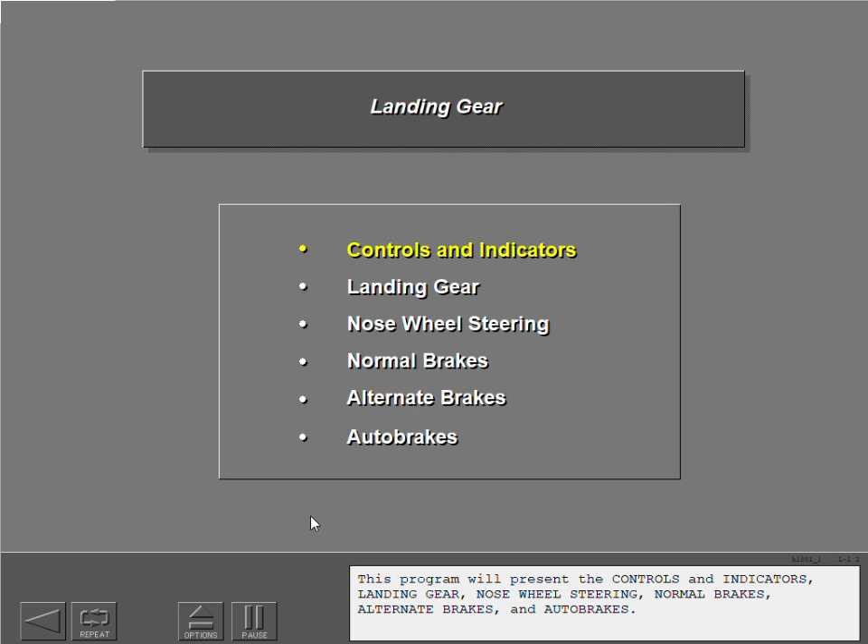The landing gear controls and indicators are located on the captain's instrument panel, the center instrument panel, the first officer's panel, the left sidewall, the control stand, and the rudder pedals.

The landing gear lever is located on the center instrument panel. Red and green landing gear indicator lights for gear position are located above the lever.

The landing gear lever has 3 positions: up, off, and down. A placard below the handle displays the landing gear limit speeds.

Maximum gear extend speed is 270 knots, or 0.82 Mach. Maximum gear retract speed is 235 knots. Maximum speed with the gear extended is 320 knots, or 0.82 Mach.

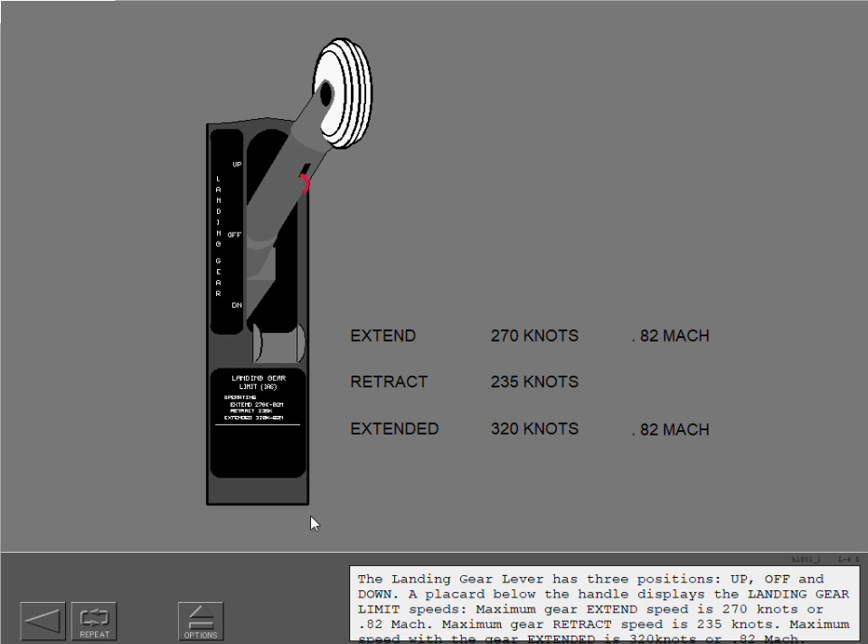Manual gear extension handles are located on the cockpit floor to the left of the first officer's seat.

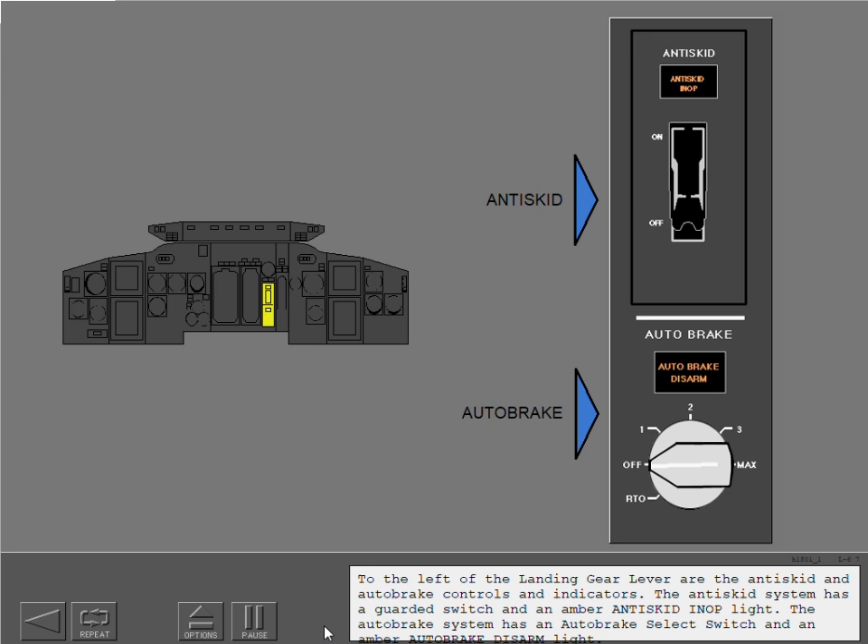To the left of the landing gear lever are the anti-skid and auto brake controls and indicators. The anti-skid system has a guarded switch and an amber anti-skid in-op light. The auto brake system has an auto brake select switch and an amber auto brake disarm light.

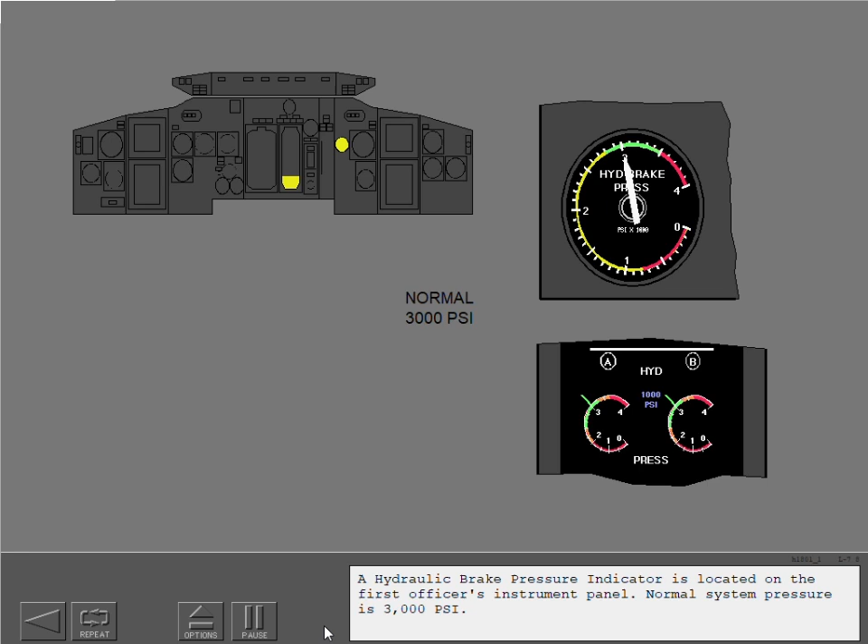A hydraulic brake pressure indicator is located on the first officer's instrument panel. Normal system pressure is 3,000 psi.

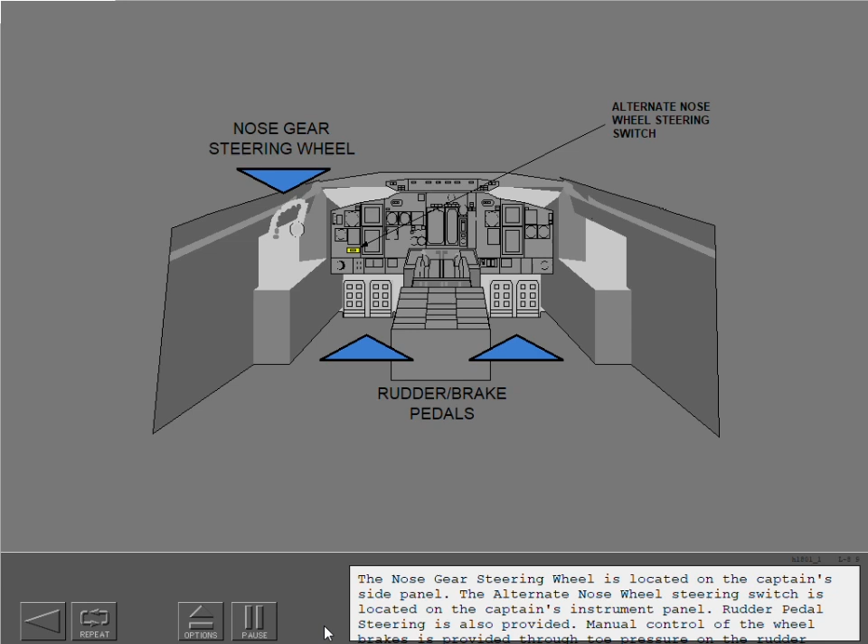The nose gear steering wheel is located on the captain's side panel. The alternate nose wheel steering switch is located on the captain's instrument panel. Rudder pedal steering is also provided. Manual control of the wheel brakes is provided through toe pressure on the rudder pedals.

The parking brake lever and red parking brake warning light are located on the control stand.

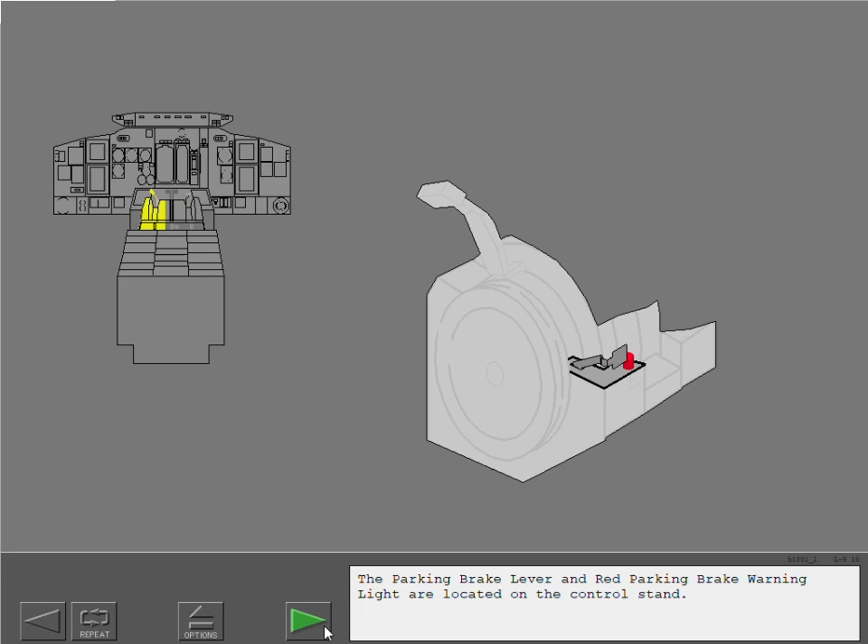With a review of the controls and indicators complete, we are ready to discuss the landing gear.

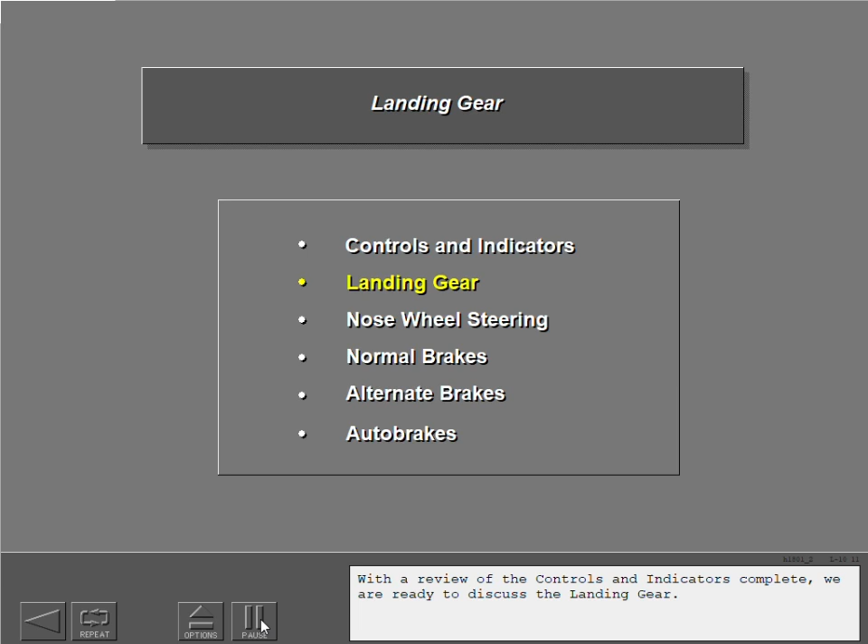In normal operation, the landing gear is powered by hydraulic system A. Hydraulic system B can raise the gear through the landing gear transfer unit.

The 737 has a dual-wheel tricycle landing gear. The gear retracts into the fuselage to reduce drag.

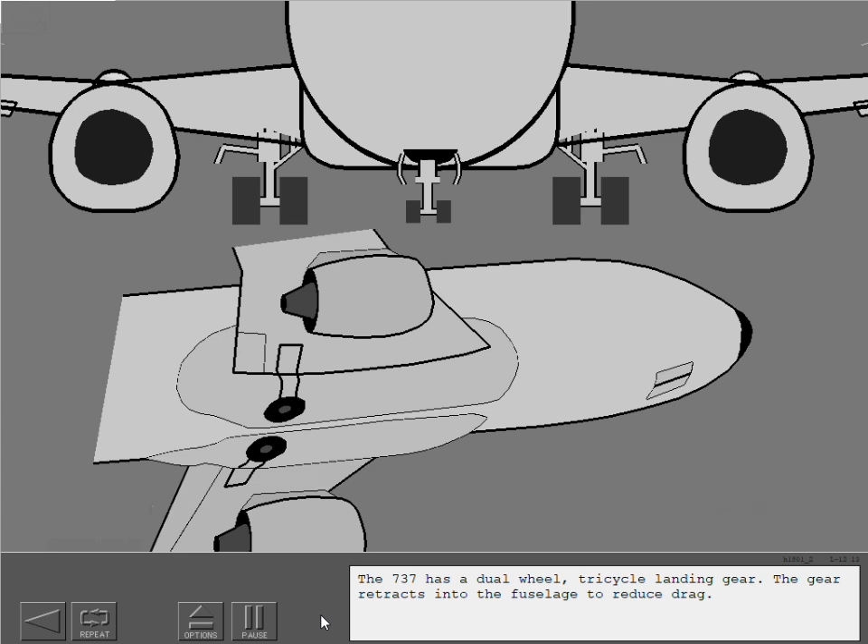Doors attached to the main gear struts provide cover for the wing and portions of the fuselage openings when the main gear are retracted.

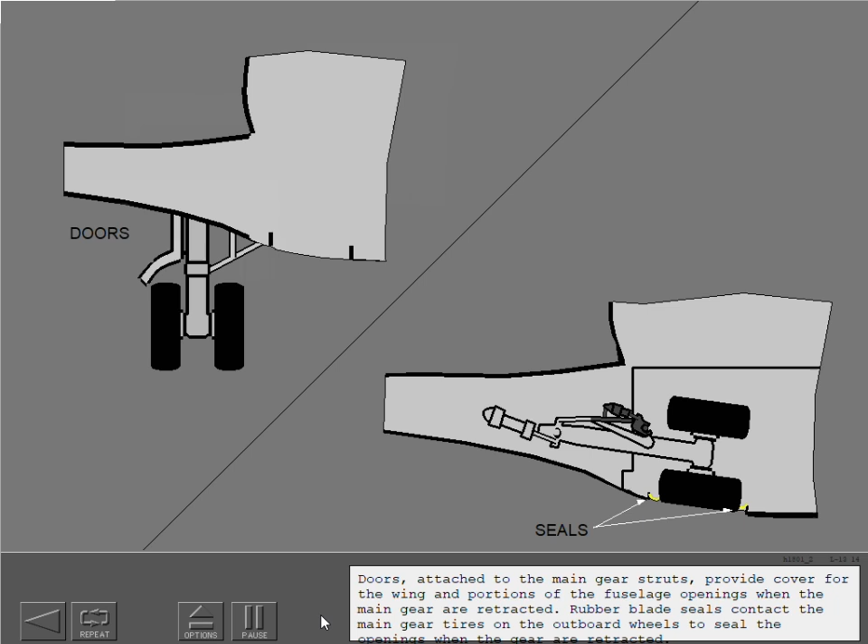Rubber blade seals contact the main gear tires on the outboard wheels to seal the openings when the gear are retracted.

The nose gear doors are mechanically linked to the nose gear. There is no indication in the cockpit of nose gear door position.

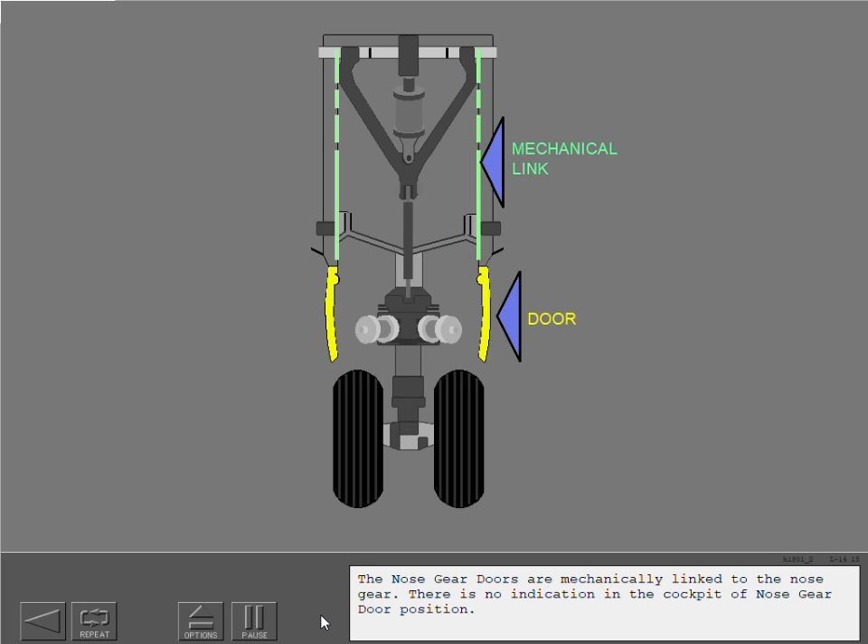To raise the landing gear, first pull the landing gear lever out of the down detent. The red gear indicator lights illuminate, indicating a disagreement between lever and gear position. The green lights remain illuminated until the gear leaves the down and locked position.

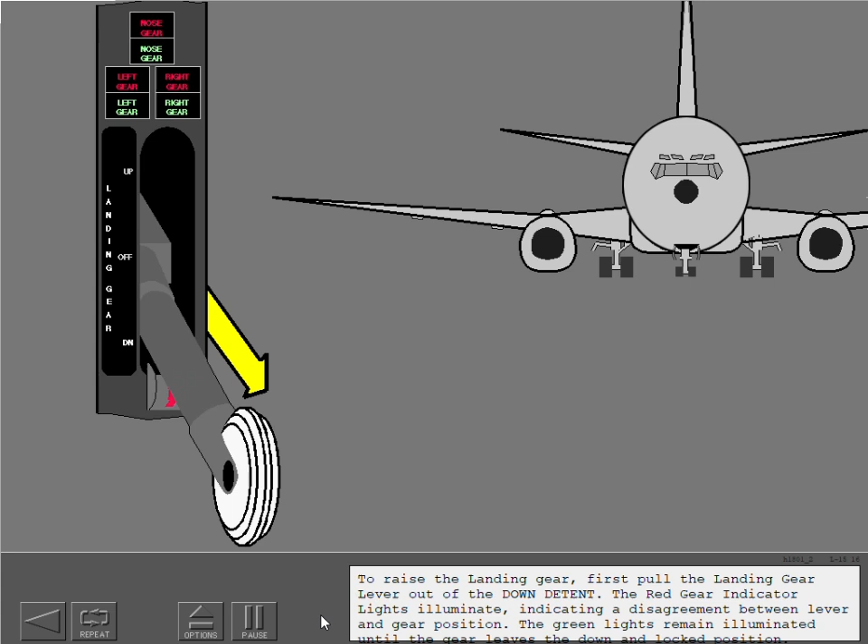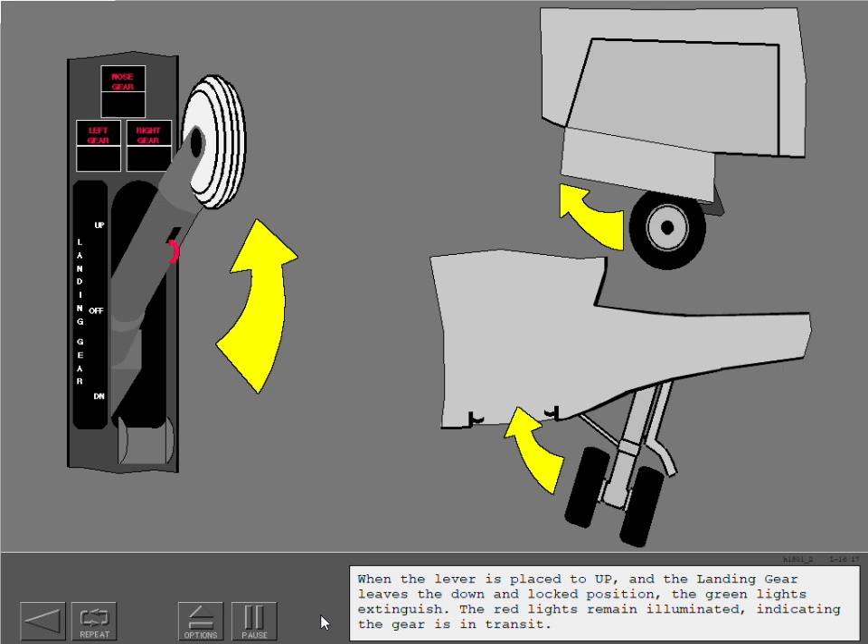When the lever is placed to up and the landing gear leave the down and locked position, the green lights extinguish. The red lights remain illuminated, indicating the gear is in transit.

As the main landing gear retracts, the brakes are automatically applied to stop the rotation of the main wheels. A snubber in the nose wheel well stops the rotation of the nose wheel.

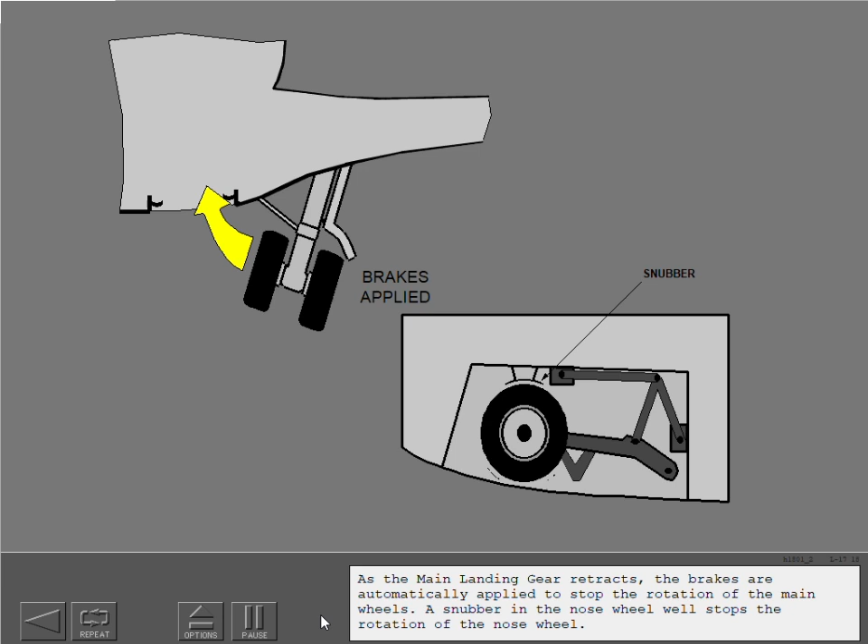The nose gear is held in the up position by an over-centered link. The main gear is held by an up-lock hook. These are mechanical locks and do not require hydraulic pressure to hold the landing gear up and locked.

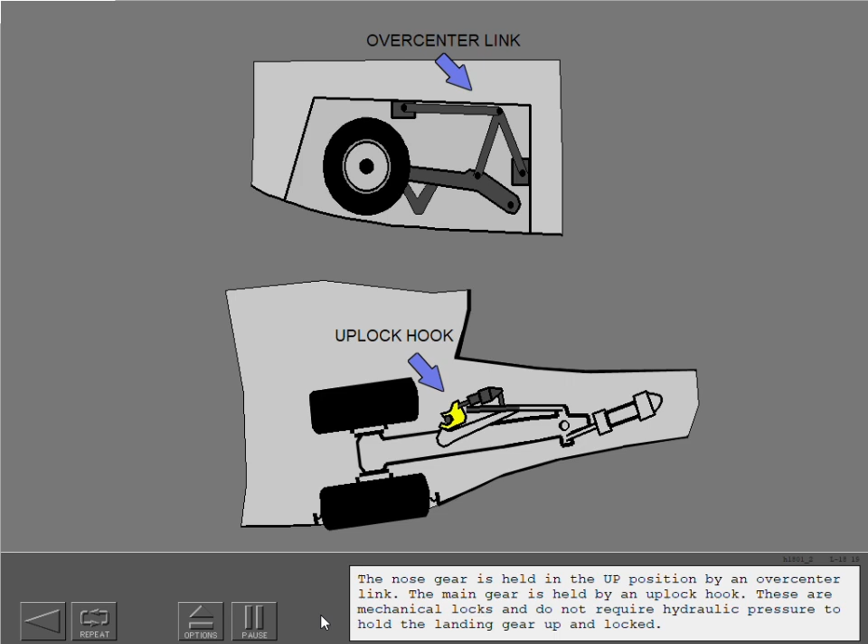When the landing gear is up and locked, the red indicator lights extinguish. After a minimum of 10 seconds, the landing gear lever may be placed to the off position. This removes hydraulic pressure from the landing gear system.

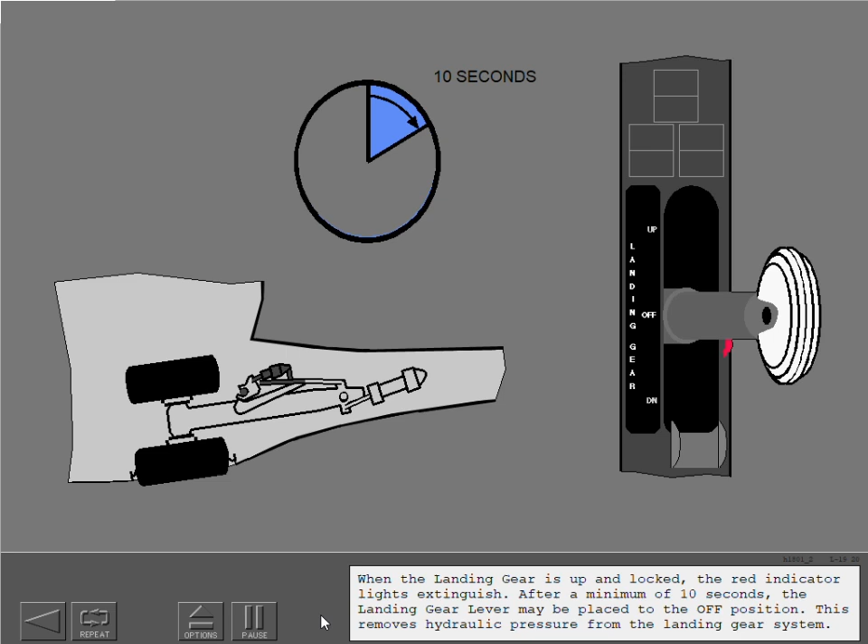There are several landing gear retraction safety features. When on the ground, a lever lock prevents gear lever movement to the up position. If the gear lever will not move to the up position after takeoff, pulling the override trigger bypasses the lever lock and allows the landing gear to be raised if necessary.

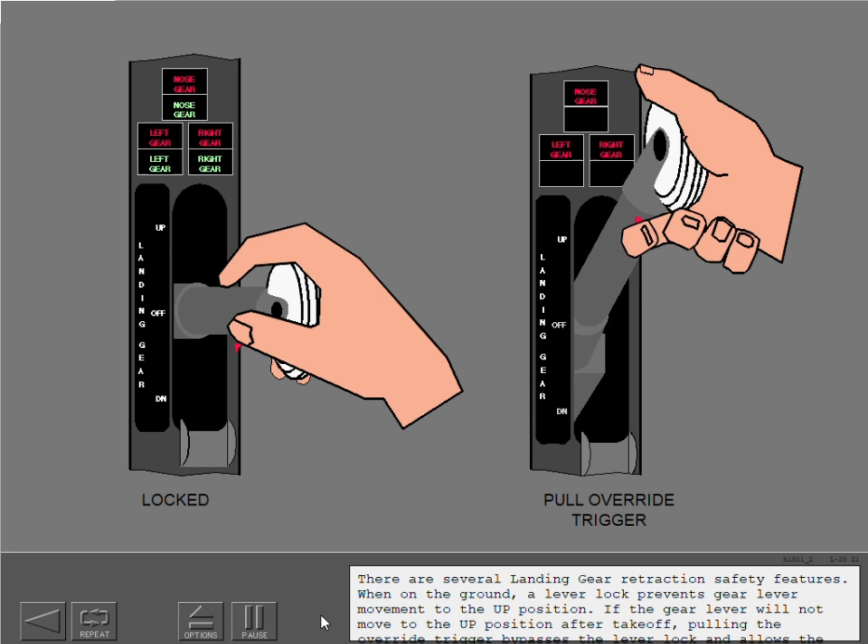Also after takeoff, if engine number 1 should fail, a landing gear transfer unit ensures there is sufficient hydraulic pressure to raise the landing gear.

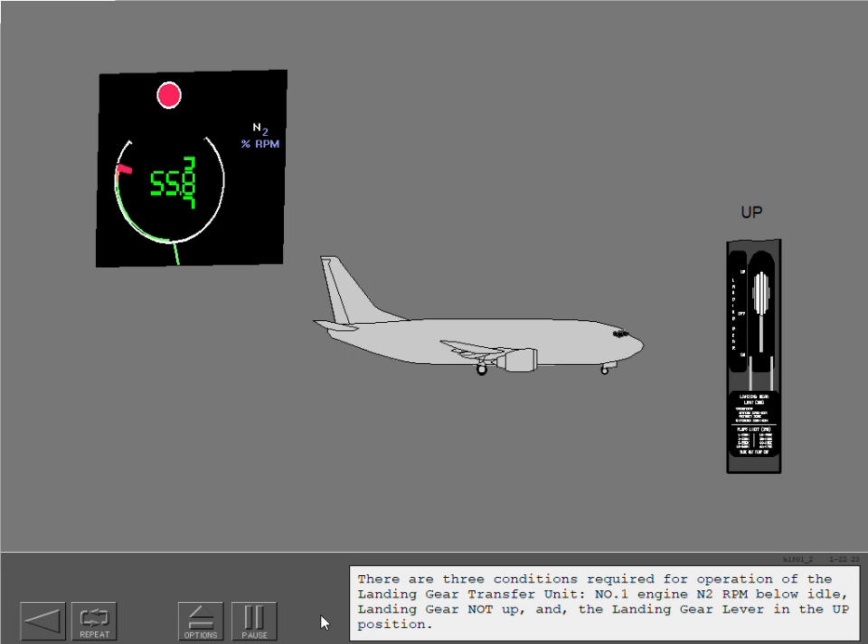There are 3 conditions required for operation of the landing gear transfer unit: number 1 engine N2 RPM below idle, landing gear not up, and the landing gear lever in the up position.

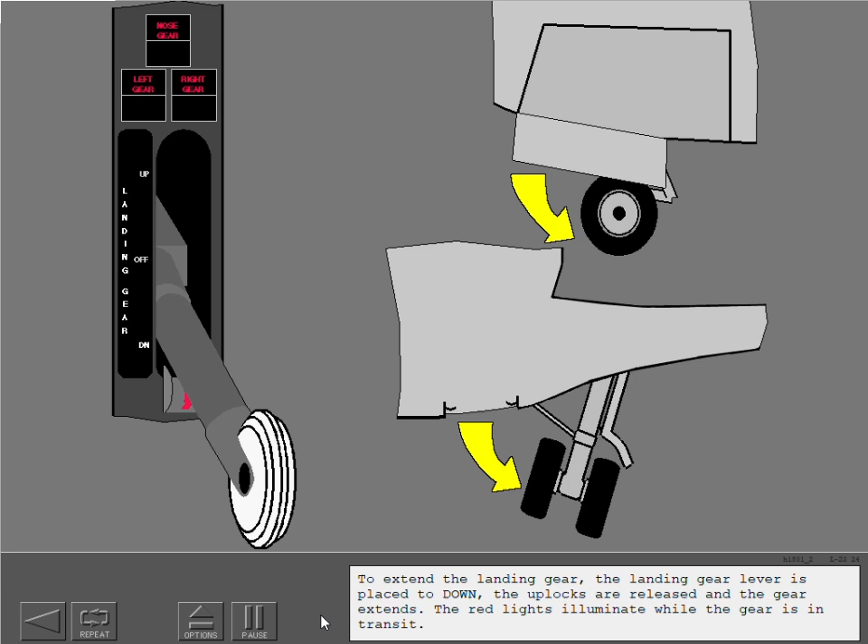To extend the landing gear lever is placed to down, the up locks are released, and the gear extends. The red lights illuminate while the gear is in transit.

The red indicator lights extinguish, and the green lights illuminate for each gear when it reaches the down and locked position. The green lights are illuminated by switches on the mechanical down-lock mechanisms. Hydraulic pressure is not required to keep the gear down and locked.

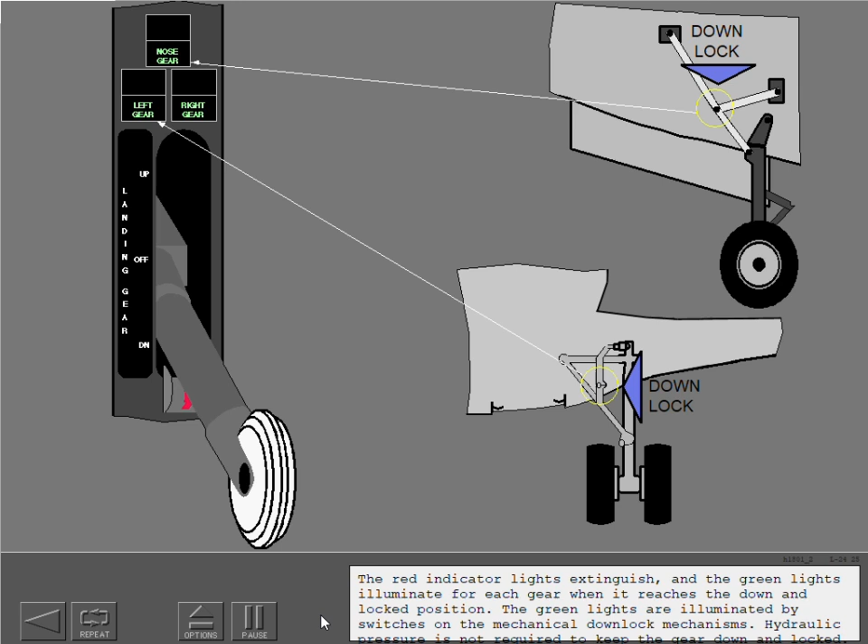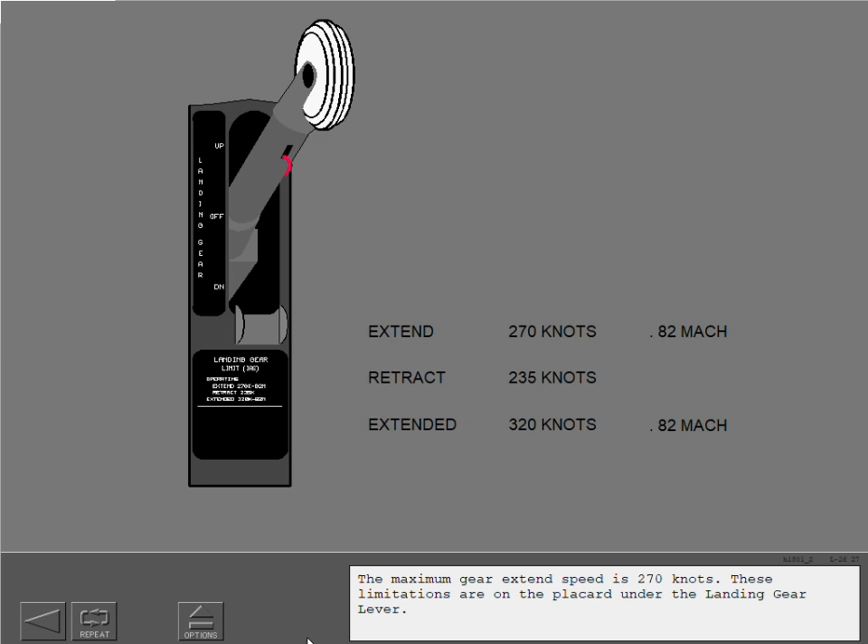The maximum gear extend speed is 270 knots. These limitations are on the placard under the landing gear lever.

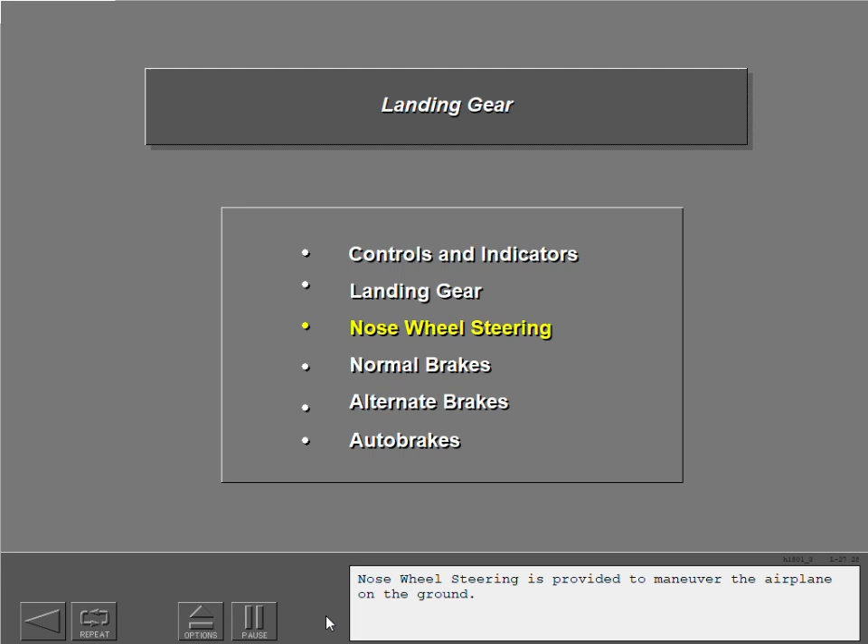Nose wheel steering is provided to maneuver the airplane on the ground. With the aircraft on the ground and the landing gear lever in the down position, hydraulic pressure is available for nose wheel steering through the landing gear hydraulic down line. When the nose wheel steering switch is in the norm position, System A hydraulic pressure provides power for steering.

Placing the nose wheel steering switch to Alt provides System B hydraulic pressure for steering. In the event of a hydraulic leak downstream of the landing gear transfer unit, resulting in a loss of hydraulic System B fluid in the reservoir, a sensor closes the landing gear transfer valve and alternate steering will not be available.

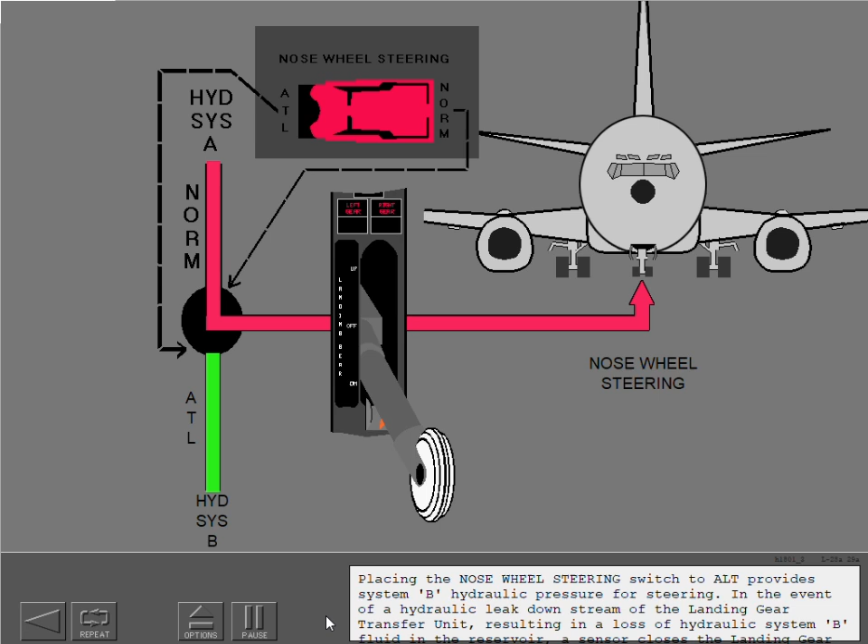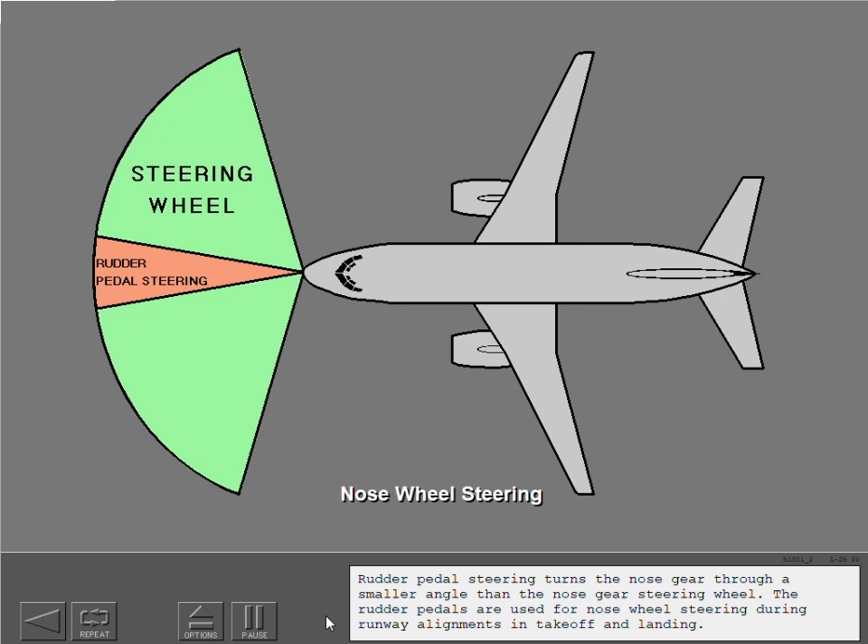Rudder pedal steering turns the nose gear through a smaller angle than the nose gear steering wheel. The rudder pedals are used for nose wheel steering during runway alignments in takeoff and landing. As the nose wheel strut extends on takeoff, rudder pedal steering is deactivated. Steering actuators are mounted on the nose wheel strut.

The steering depressurization valve is provided with a lockout pin. When the lockout pin is installed, the airplane may be towed with hydraulic System A pressurized. Without the pin installed, System A must be depressurized for towing operations. Do not attempt to taxi with the pin installed.

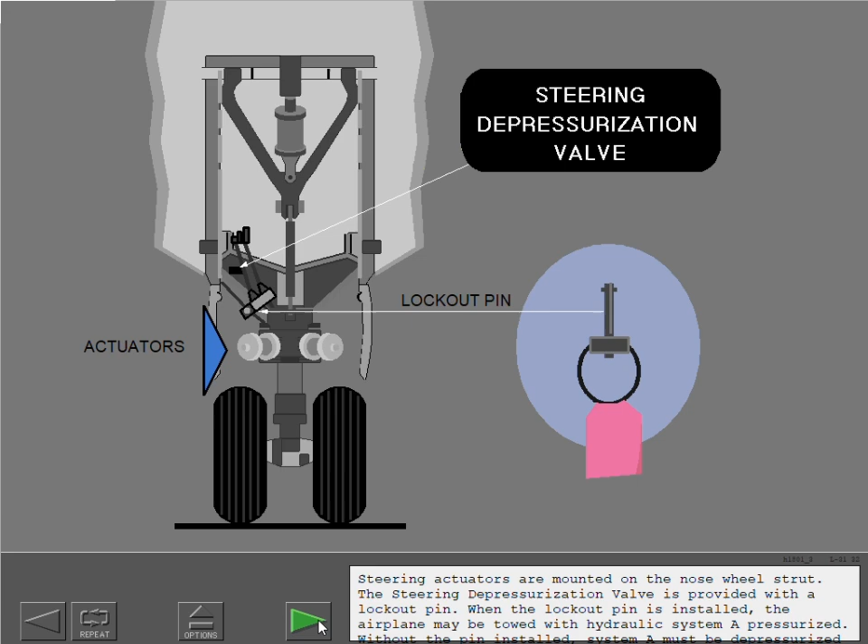The 737 has only main landing gear brakes. First, let's look at the normal brakes. Normal brake system operation consists of manual brakes and automatic brakes. Hydraulic System B powers the normal brakes.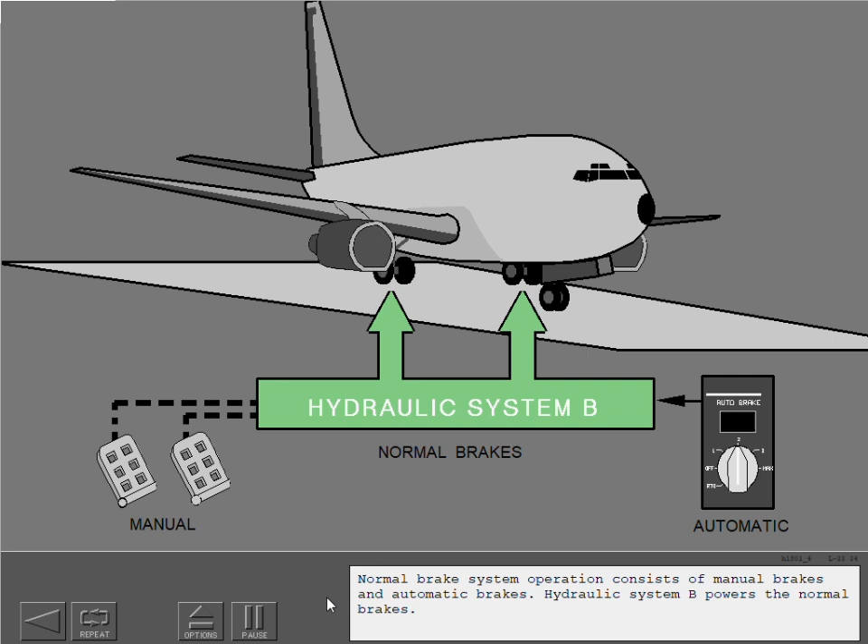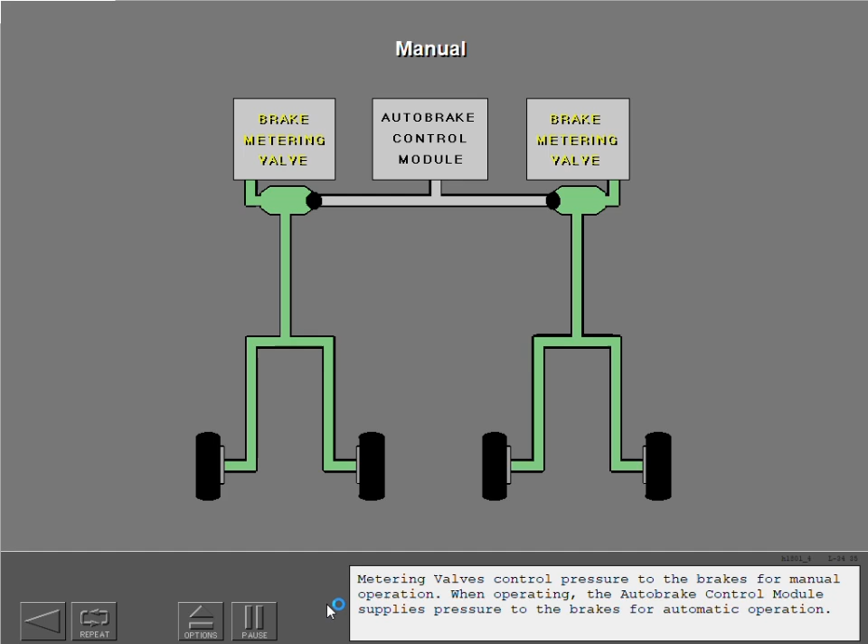Metering valves control pressure to the brakes for manual operation. When operating, the auto brake control module supplies pressure to the brakes for automatic operation. Normal brakes are controlled by the rudder pedals through the brake metering valves. From the brake metering valves, normal brake pressure is supplied to each wheel and further controlled by anti-skid valves.

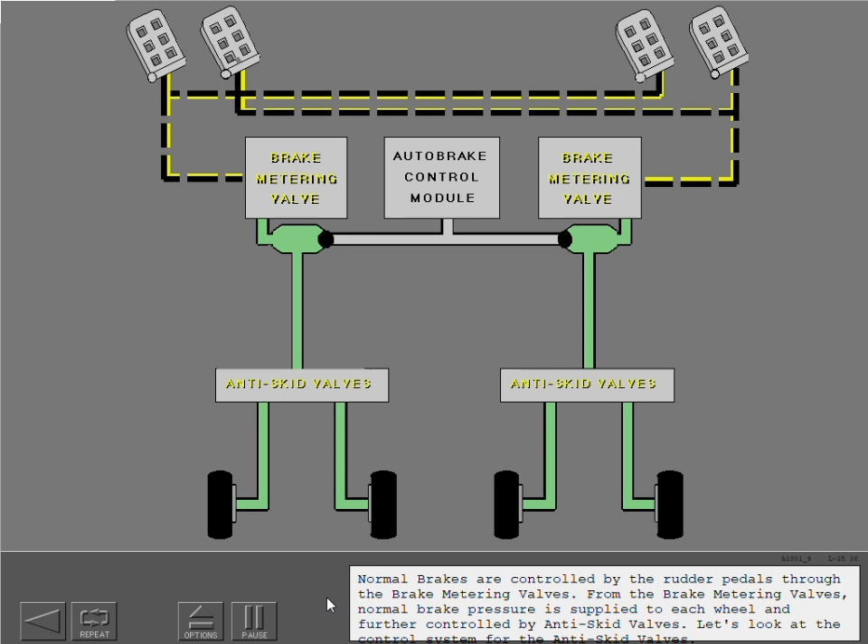Let's look at the control system for the anti-skid valves. Each wheel has a transducer which measures wheel speed. The anti-skid auto brake control unit receives inputs from each of the wheel speed transducers, which allows it to detect a skid or locked wheel condition.

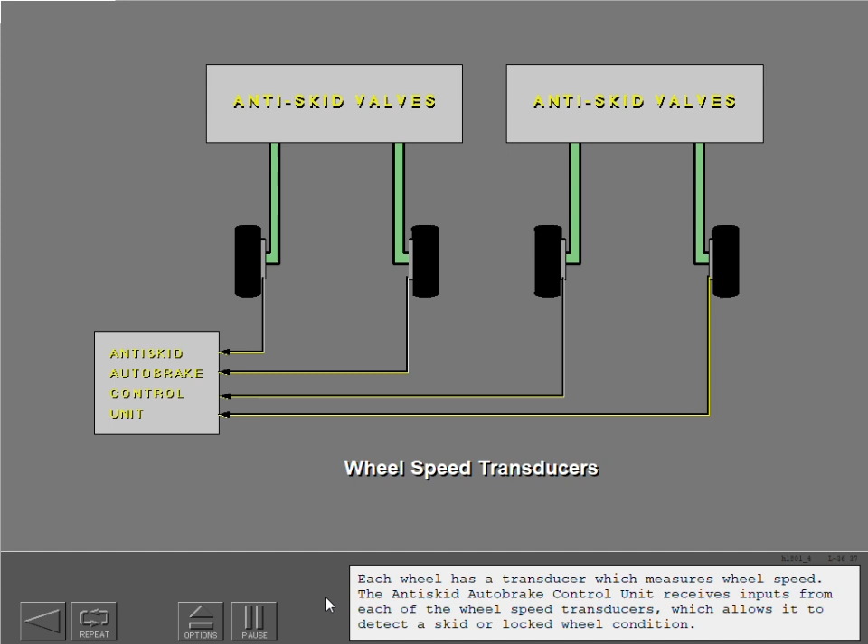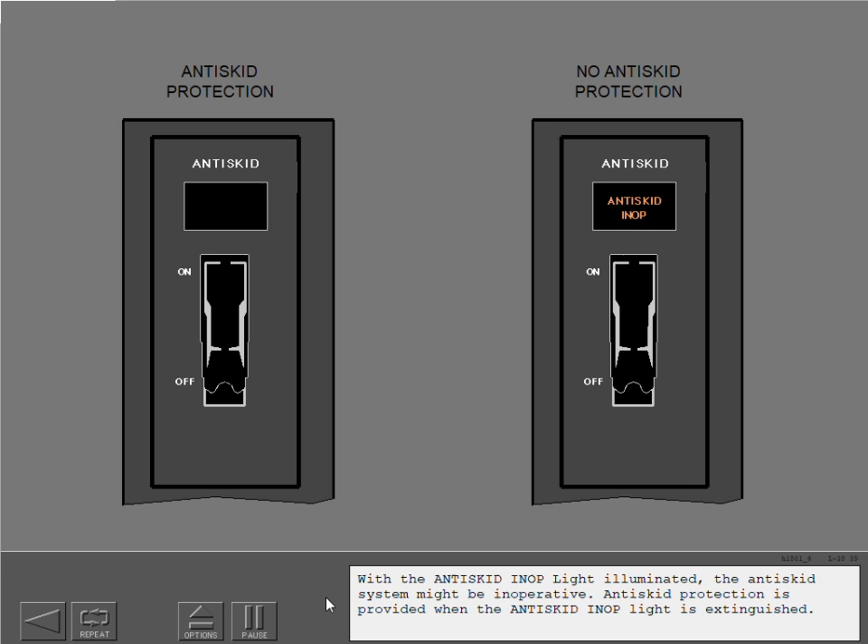The anti-skid switch controls power to the anti-skid control unit. The anti-skid control unit regulates the anti-skid valves. With the anti-skid in-op light illuminated, the anti-skid system might be inoperative. Anti-skid protection is provided when the anti-skid in-op light is extinguished. Anti-skid protection is provided for each wheel in the event of a skid or a locked wheel. Touchdown protection is also provided.

Pressing both brake pedals from either pilot's side and pulling up on the parking brake handle sets the parking brake and mechanically locks the pedals down. The red parking brake light illuminates. The anti-skid system is deactivated with the parking brake set.

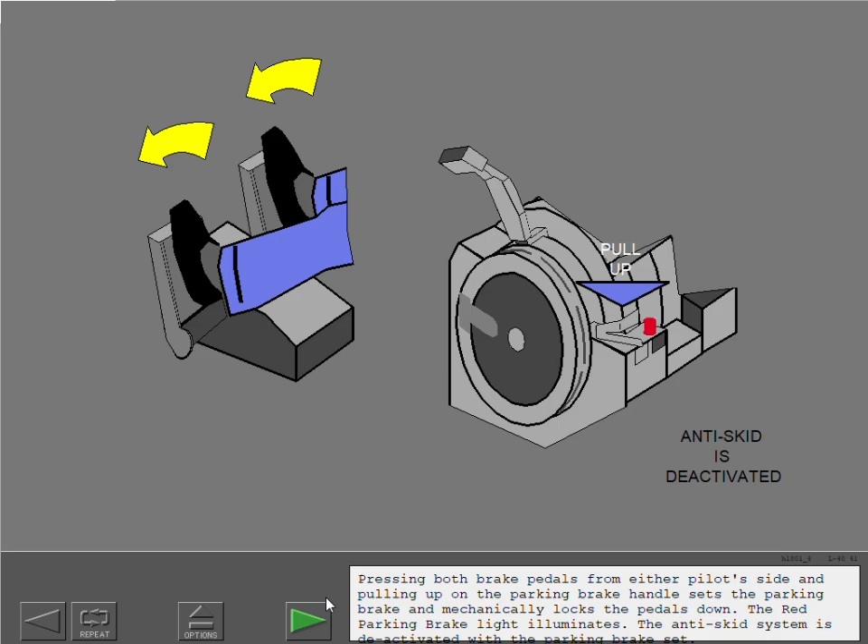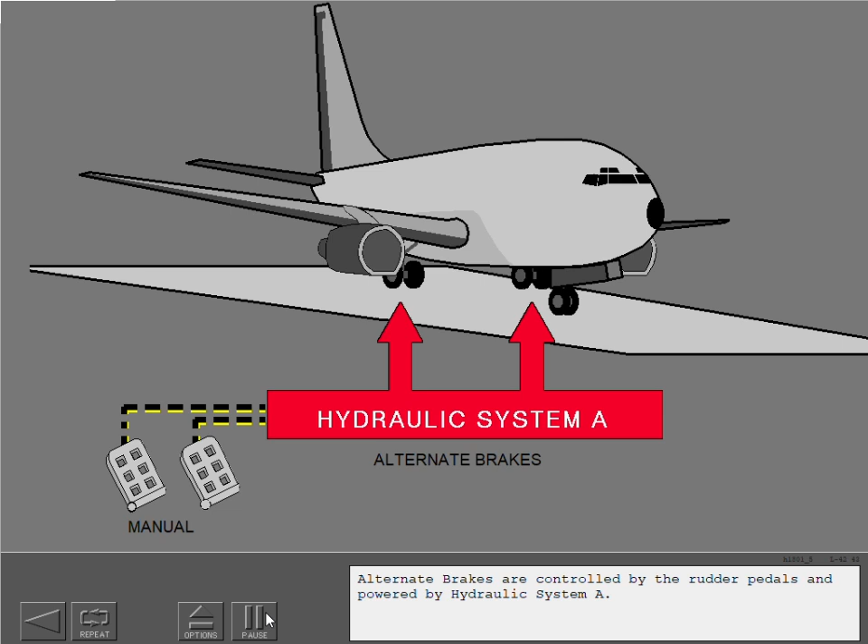Let's now look at alternate brakes. Alternate brakes are controlled by the rudder pedals and powered by hydraulic system A. When system B pressure to the normal brake system is low, an alternate source selector valve opens to supply system A pressure to the alternate brake system.

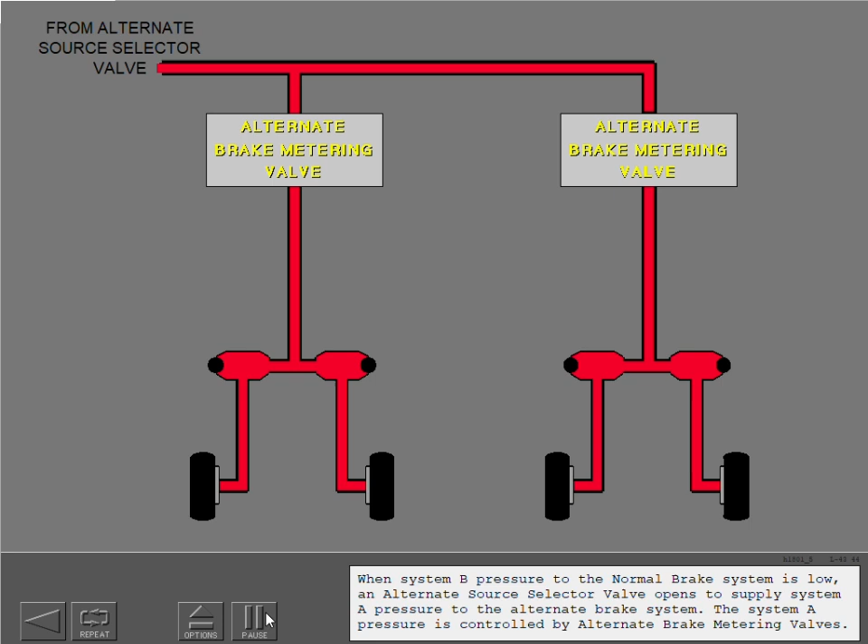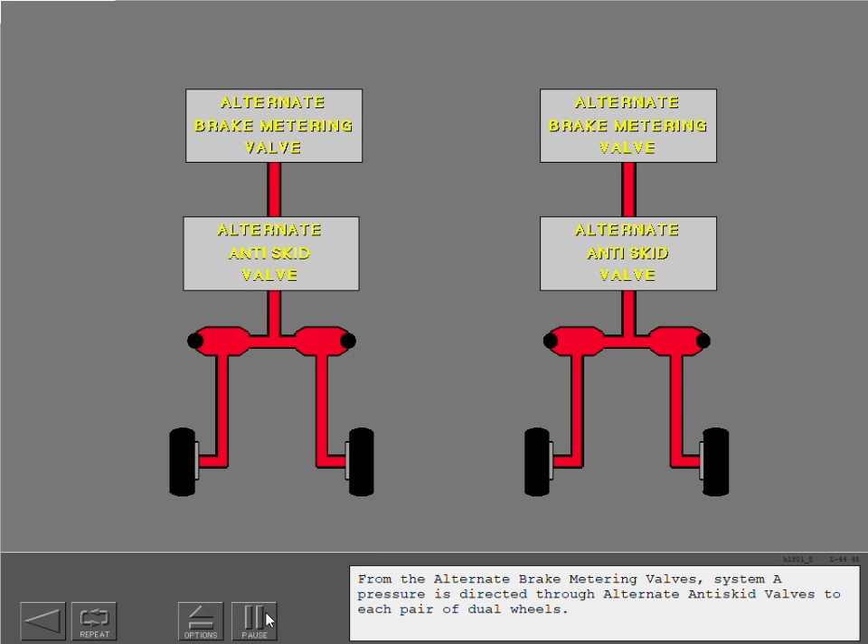The system A pressure is controlled by alternate brake metering valves. From the alternate brake metering valves, system A pressure is directed through alternate anti-skid valves to each pair of dual wheels. The anti-skid auto brake control unit regulates the alternate anti-skid valves, and the valves are monitored by the anti-skid in-op light.

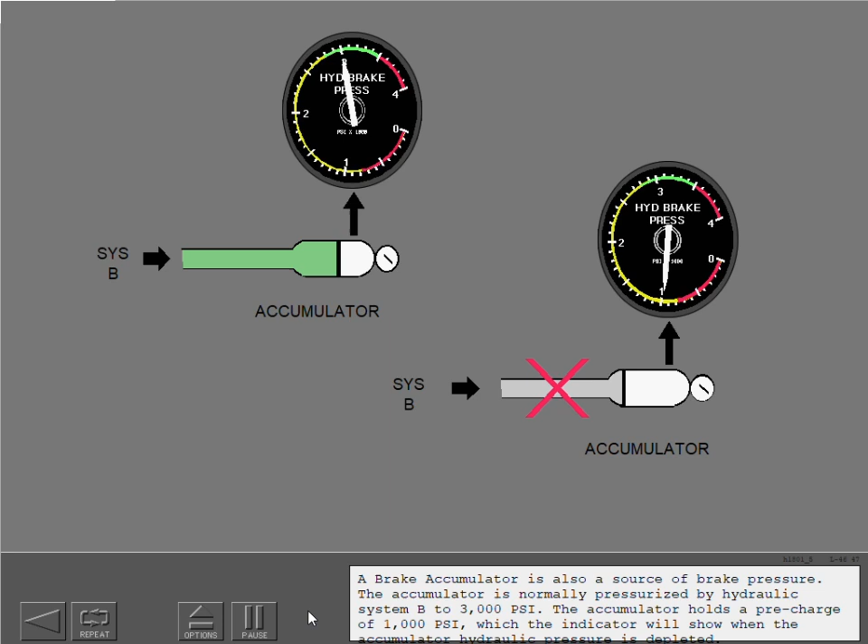A brake accumulator is also a source of brake pressure. The accumulator is normally pressurized by hydraulic system B to 3,000 psi. The accumulator holds a pre-charge of 1,000 psi, which the indicator will show when the accumulator hydraulic pressure is depleted. When system A and B pressure is lost, the accumulator isolation valve makes accumulator hydraulic pressure available to the brake metering valves.

B is the correct answer.

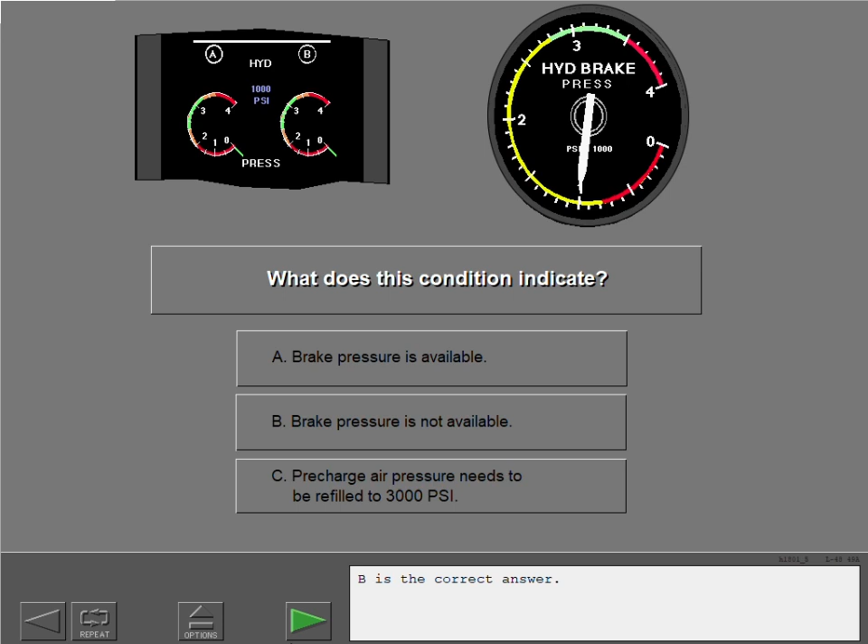In the event of the loss of hydraulic system A and B, only accumulator hydraulic pressure is available for braking. After the accumulator hydraulic pressure is depleted, the indicator will read pre-charge only and no brakes are available.

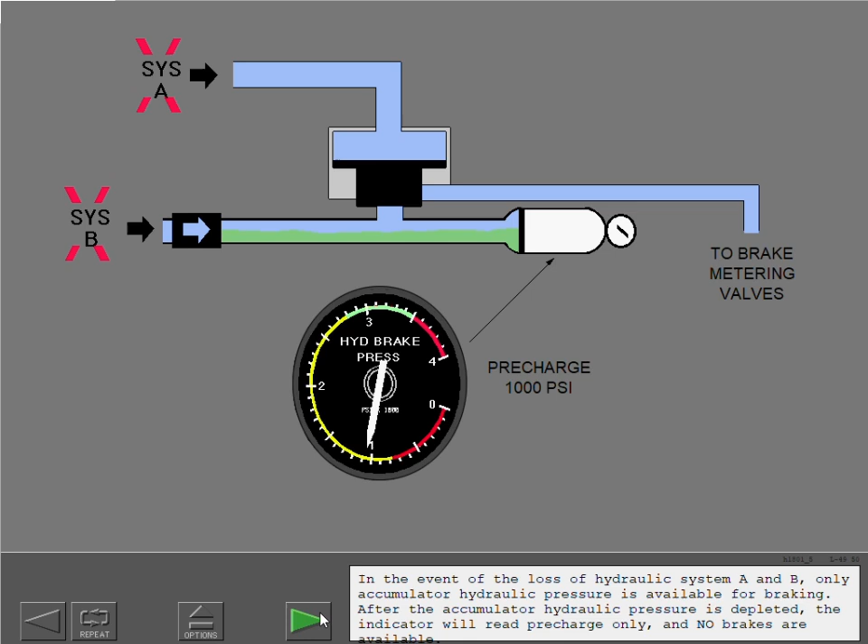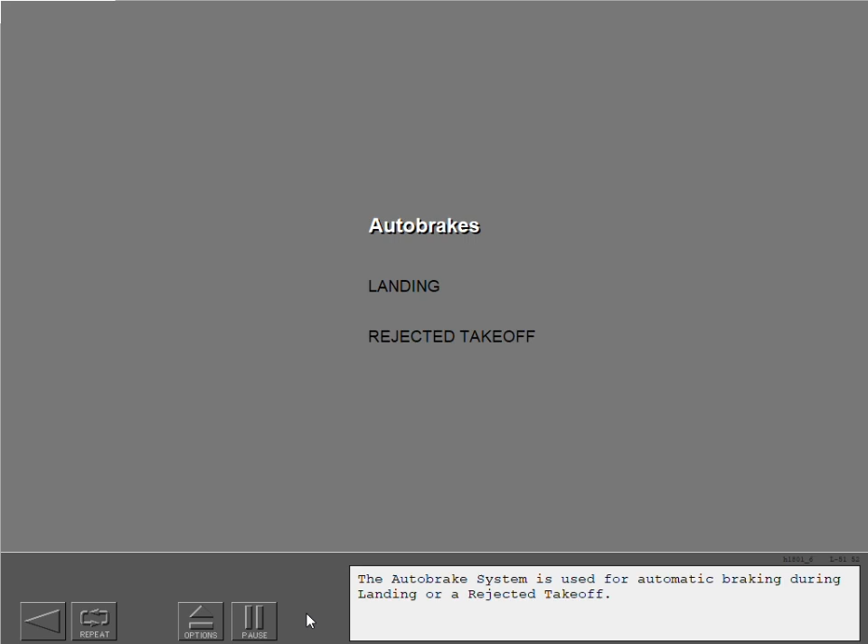The auto brake system is used for automatic braking during landing or a rejected takeoff. Like the normal brake system, the auto brake system uses system B hydraulic pressure. The system controls pressure for the selected rate of deceleration through the auto brake control module. Pressure is then applied to the anti-skid valves for anti-skid control. The wheel speed transducers provide signals to the anti-skid auto brake control unit for wheel deceleration information.

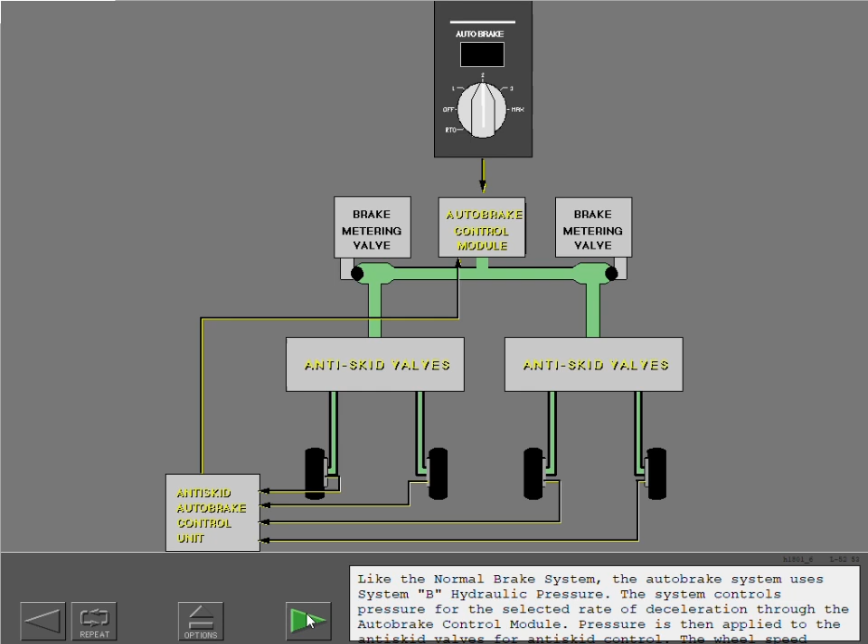The auto brakes can initiate braking action faster than can a pilot. The most efficient braking action can be accomplished by use of auto brakes to initiate braking, followed by pilot-initiated reverse thrust and manual braking.

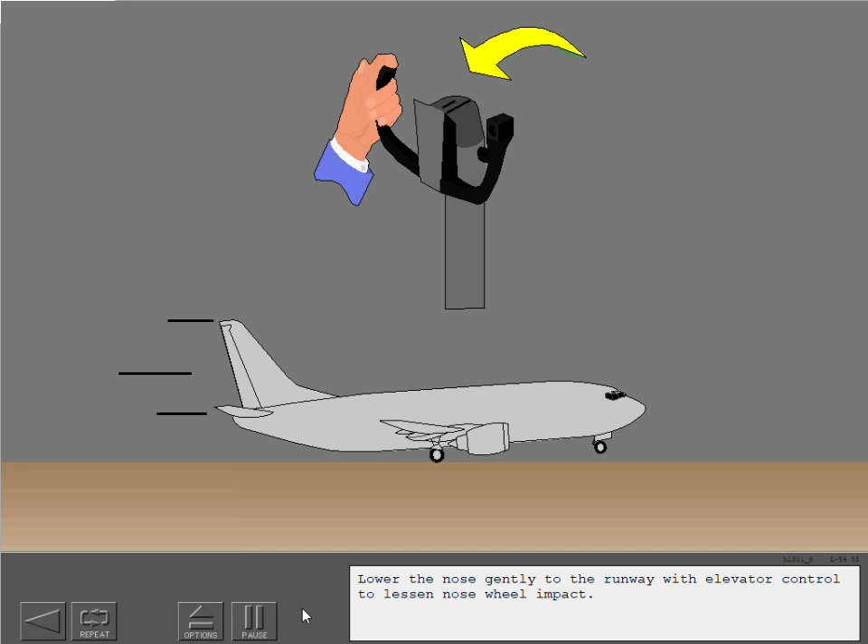Lower the nose gently to the runway with elevator control to lessen nose wheel impact.

Four deceleration rates can be selected. The maximum setting is less than full normal braking. Under normal landing conditions, the auto brake system will reduce brake pressure as reverse thrust becomes effective, so that the total deceleration of reverse thrust plus braking is equal to the selected deceleration rate.

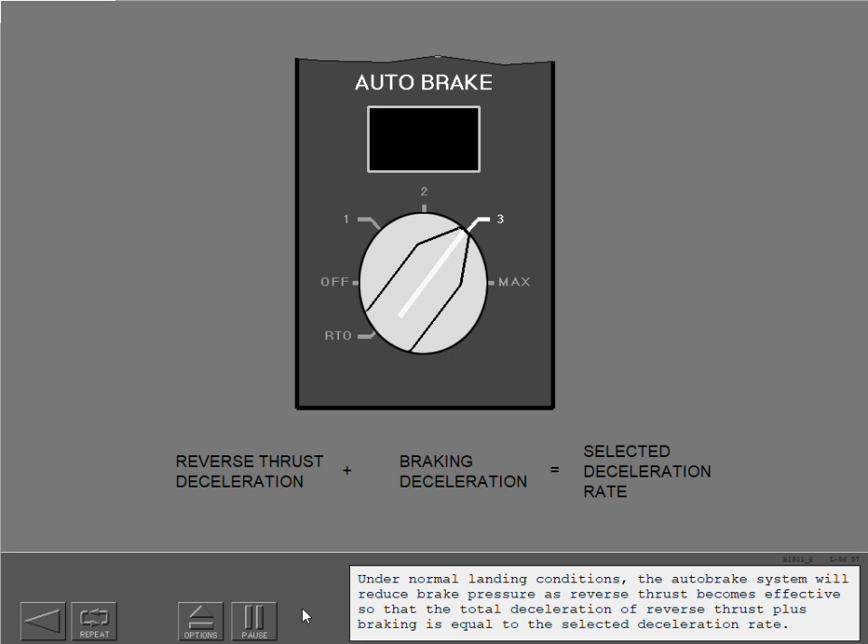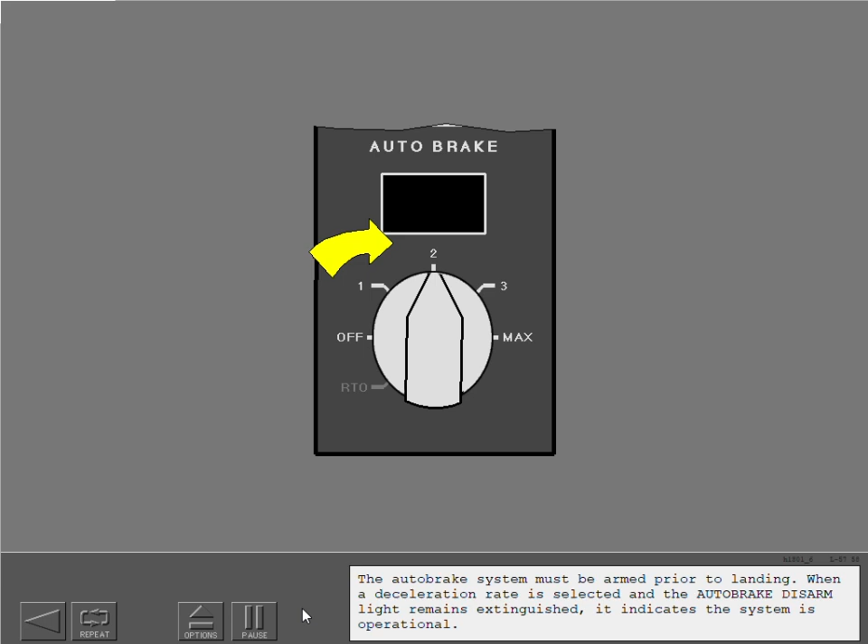The auto brake system must be armed prior to landing. When a deceleration rate is selected and the auto brake disarm light remains extinguished, it indicates the system is operational. After landing, when both thrust levers are retarded to idle and wheel spin-up has occurred, the auto brakes are applied.

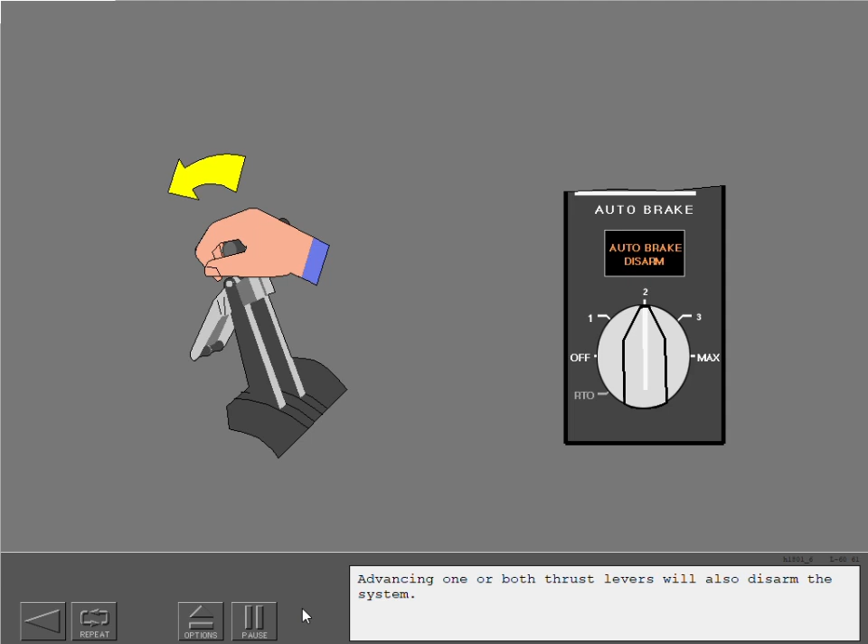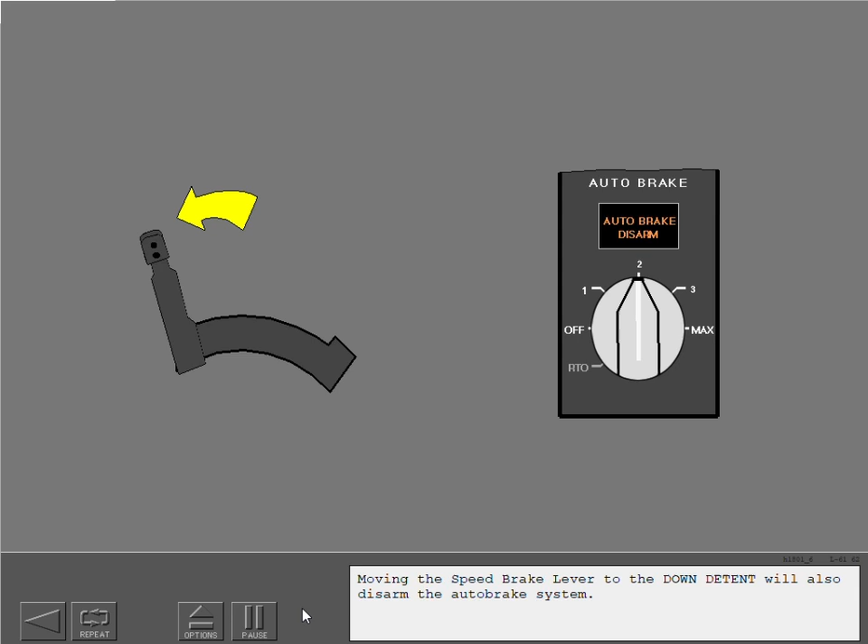On the ground, applying pressure to either pilot's brake pedals will disarm the system. The auto brake disarm light will illuminate. Advancing one or both thrust levers will also disarm the system. Moving the speed brake lever to the down detent will also disarm the auto brake system. The auto brake disarm light extinguishes with the selector in the off position. In off, power is removed from the system.

Now let's look at the rejected takeoff, or RTO, feature of the auto brake system. Prior to takeoff, the rejected takeoff mode is selected.

The auto brake disarm light will illuminate for 1 to 2 seconds while self-test is in progress. If the test is satisfactory, the auto brake disarm light will extinguish and the system is armed and ready for operation.

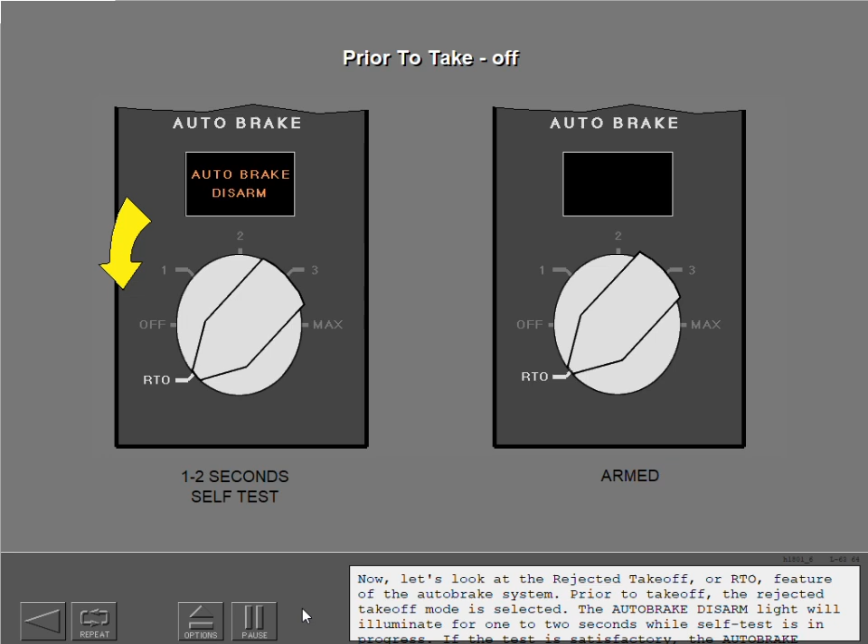During takeoff, when speed is greater than 90 knots and both forward thrust levers are retarded, auto brakes are activated. Maximum braking with anti-skid protection is applied in the RTO mode.

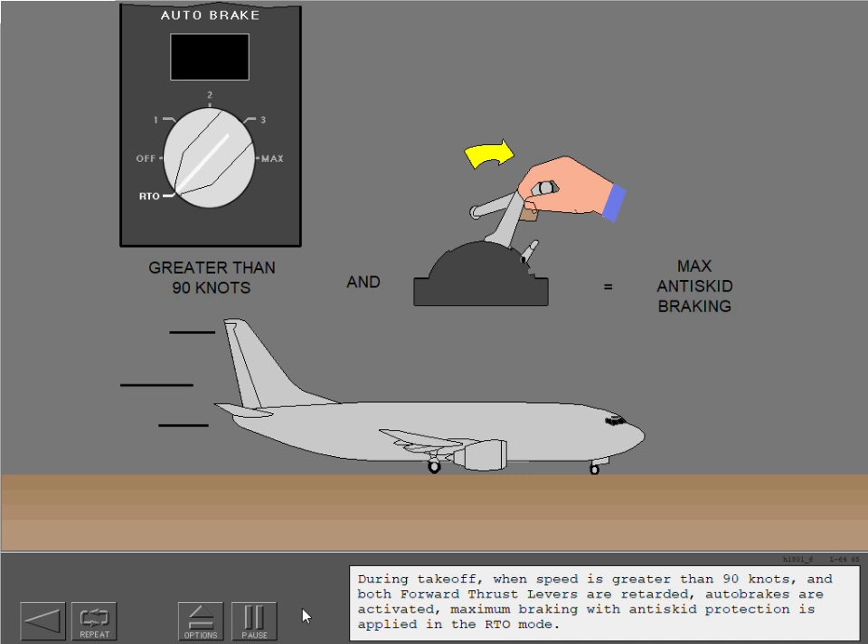At liftoff, the auto brake system is disarmed, but the selector switch remains in the RTO position. The switch must be manually returned to off.

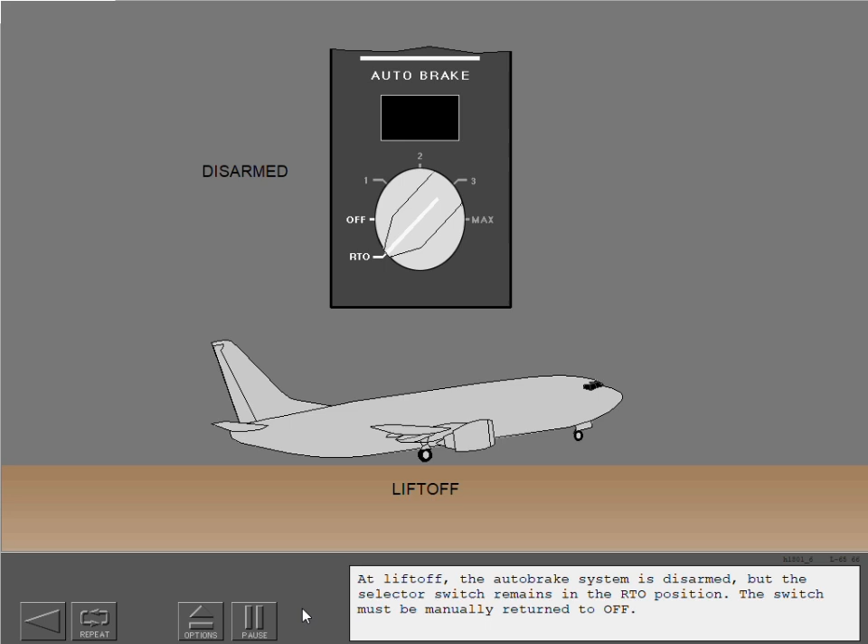Should RTO remain selected for landing, the auto brake system will disarm. Shortly after landing, the auto brake disarm light illuminates. Selecting off extinguishes the light.

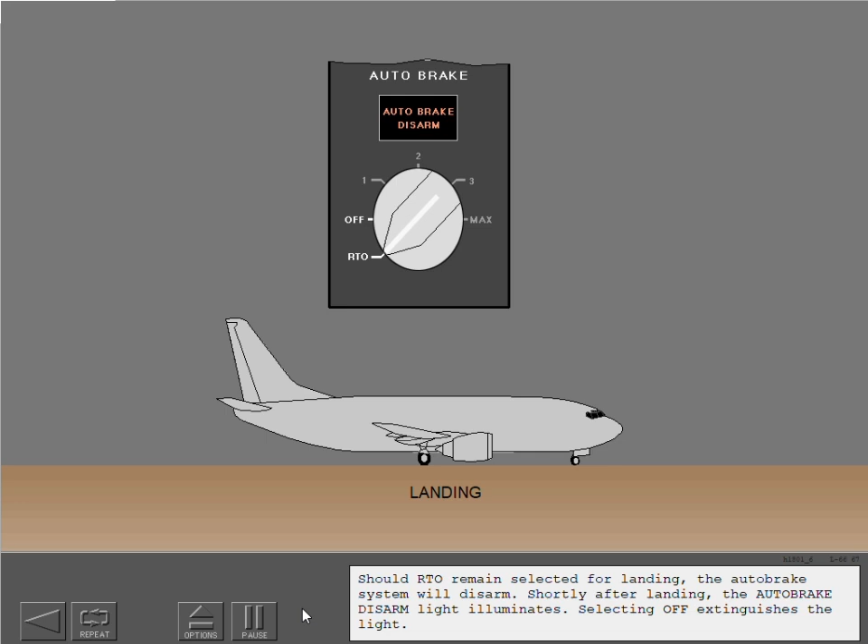Answer B is correct.

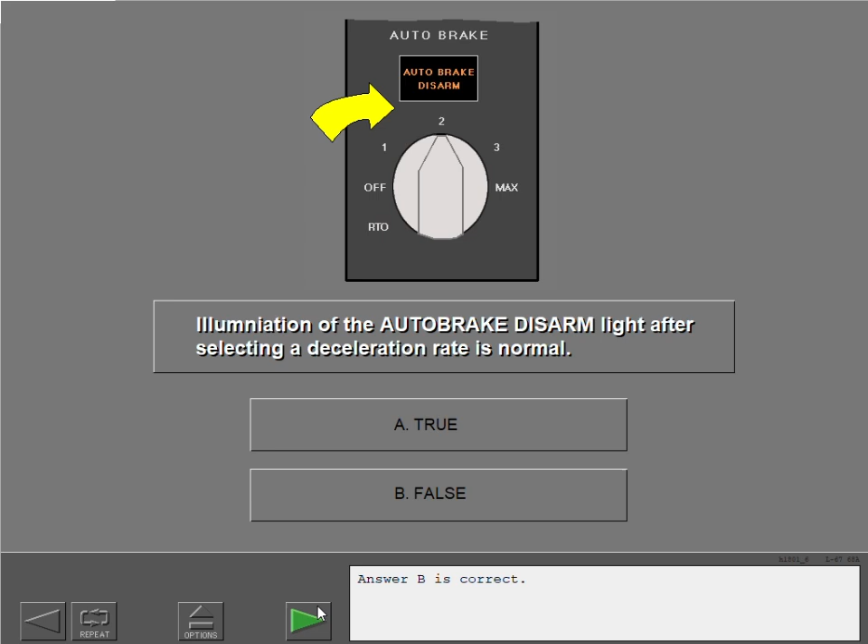The auto brake disarm light illuminates for an RTO self-test. However, during normal system operation, the light will remain extinguished when selecting a landing deceleration rate.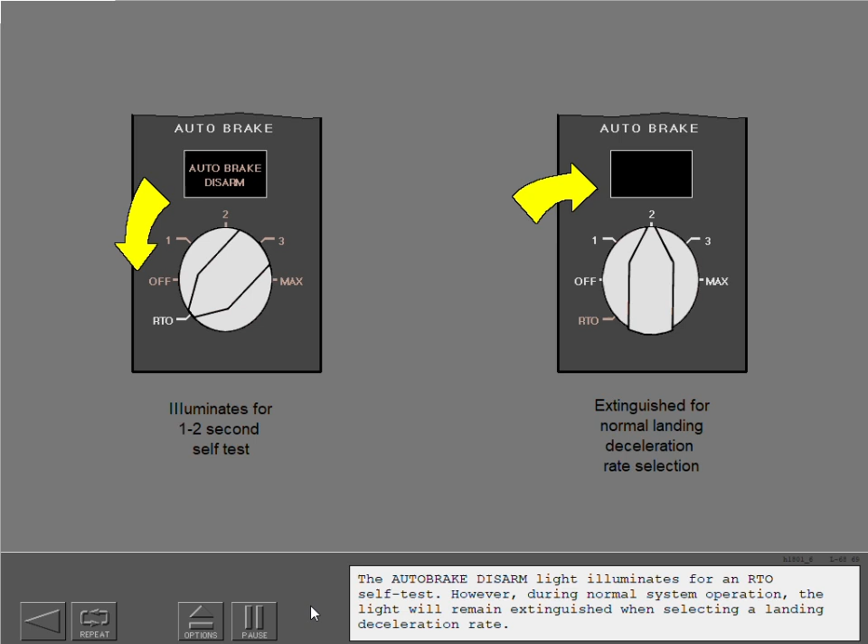This concludes the presentation on the landing gear system.

Non-normal landing gear indications and procedures will be covered next.

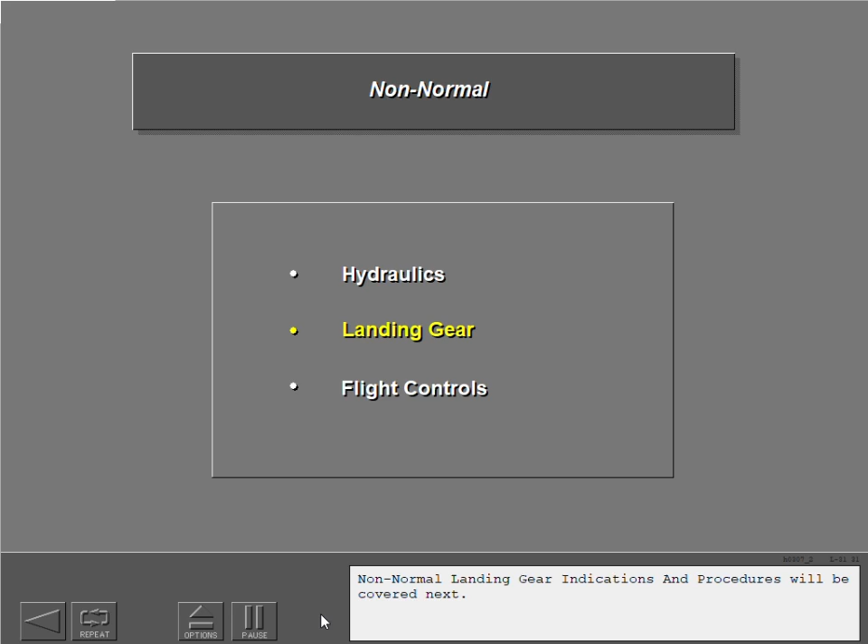The wheel well fire warning light and master fire warning switches illuminate. The fire warning bell rings continuously. The first action is to silence the fire warning bell.

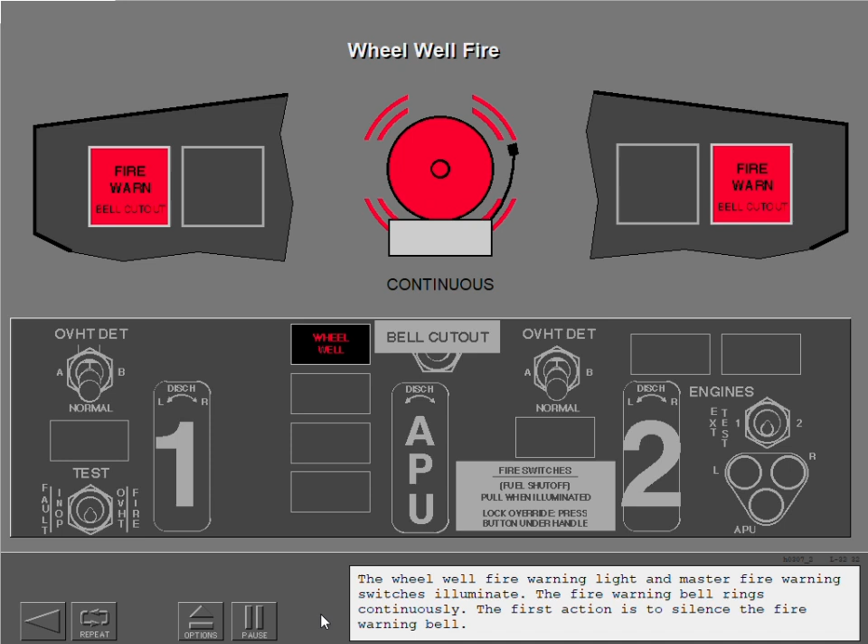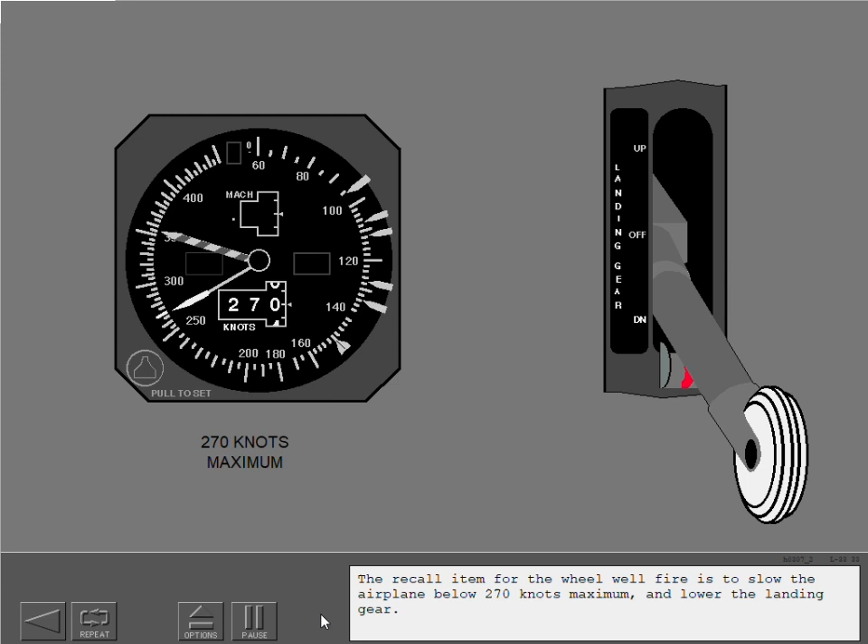The recall item for the wheel well fire is to slow the airplane below 270 knots maximum and lower the landing gear. Review the wheel well fire warning procedure in your operations manual.

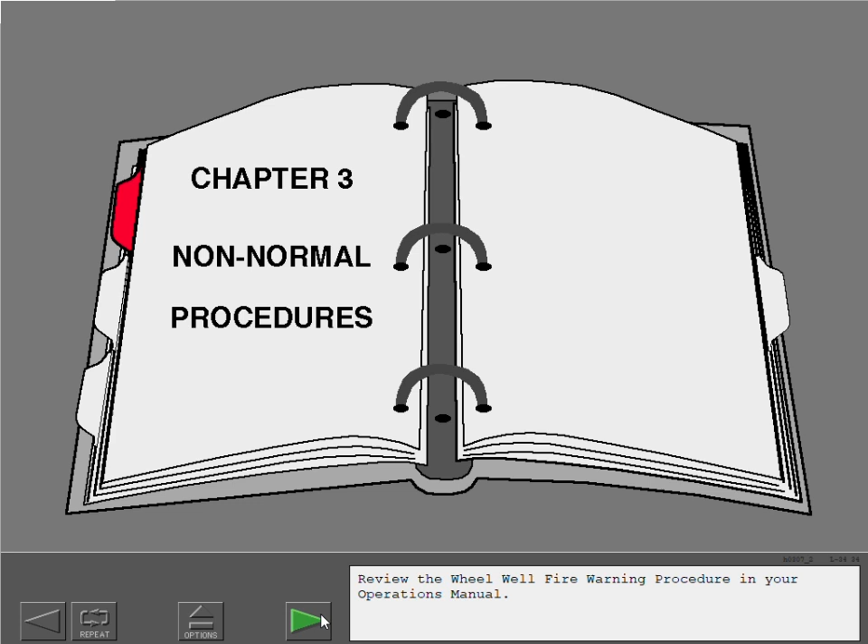If range is a factor and the landing gear must be retracted, ensure the fire is extinguished and the wheel well area has adequately cooled. Wait 20 minutes after the wheel well fire light has extinguished. Slow to 235 knots, then retract the gear.

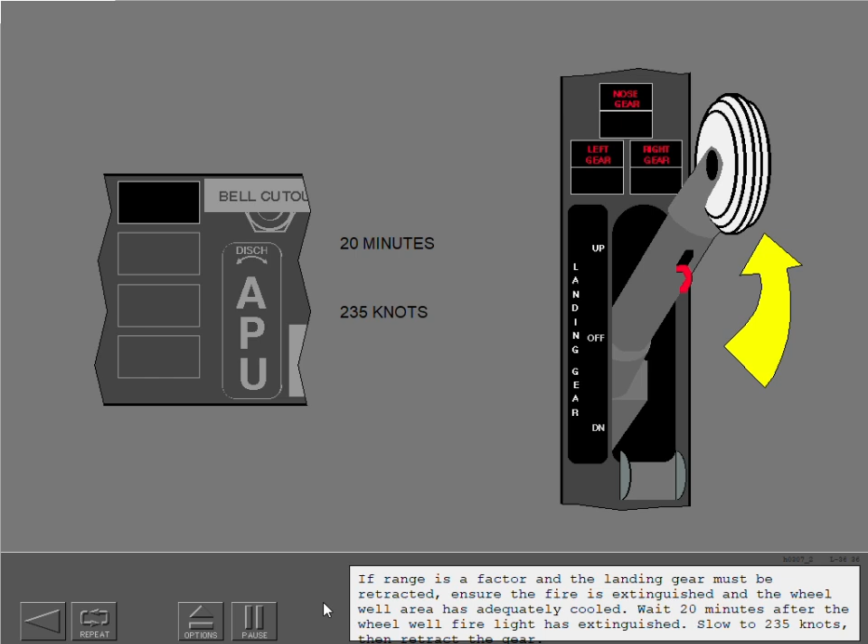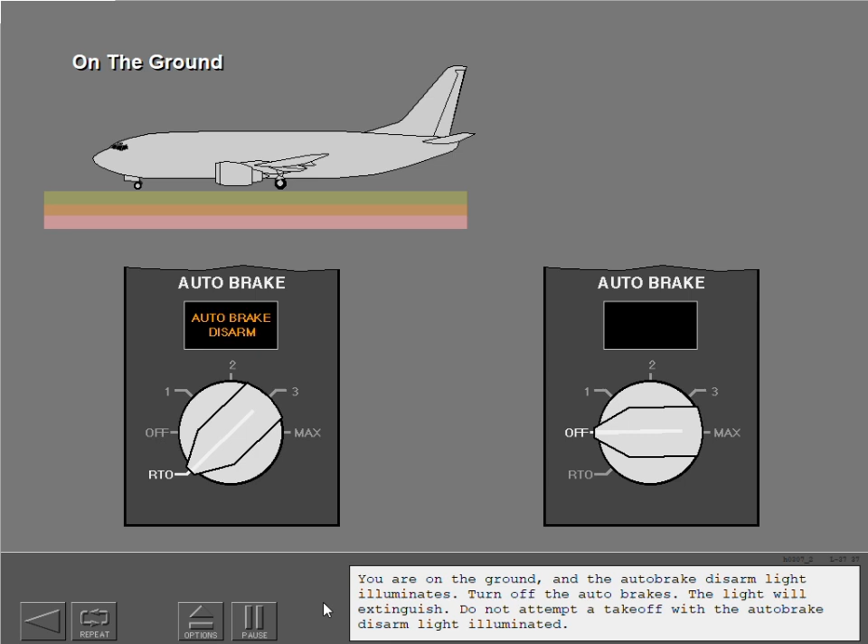You are on the ground and the auto brake disarm light illuminates. Turn off the auto brakes. The light will extinguish. Do not attempt a takeoff with the auto brake disarm light illuminated.

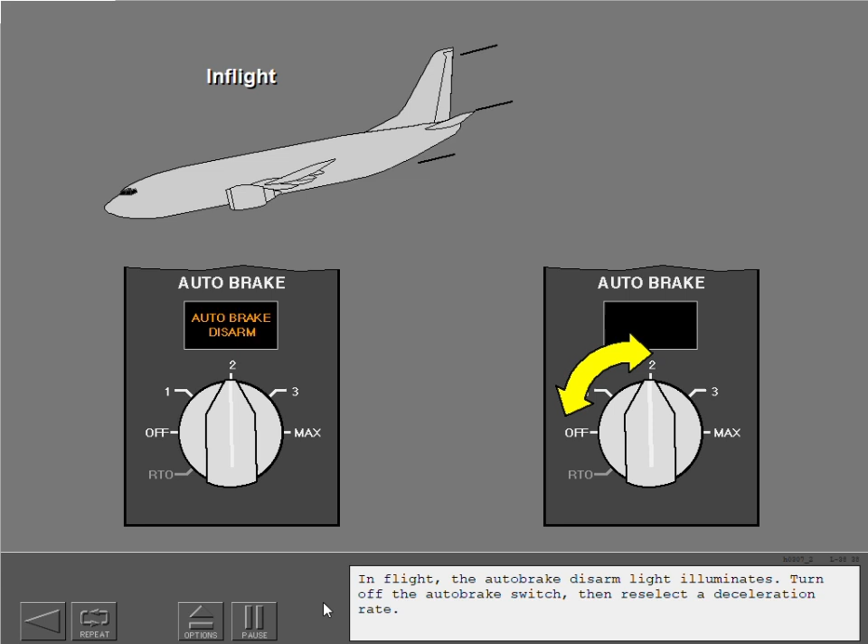In flight, the auto brake disarm light illuminates. Turn off the auto brake switch, then reselect a deceleration rate. If the light re-illuminates, turn off the auto brakes and use manual brakes.

The hydraulic brake pressure indicator reads 0. This indicates the accumulator has lost its precharge. Brake operation will not be affected with normal System A and B pressure.

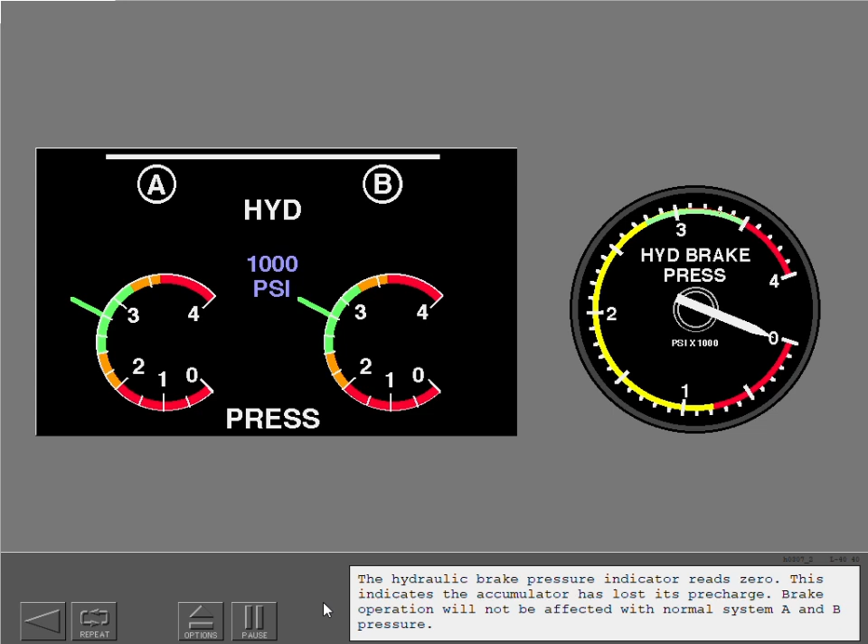The anti-skid inoperative light illuminates. This indicates a fault has been detected by the self-test feature of the anti-skid system. Position the auto brake selector to off. Brake with caution.

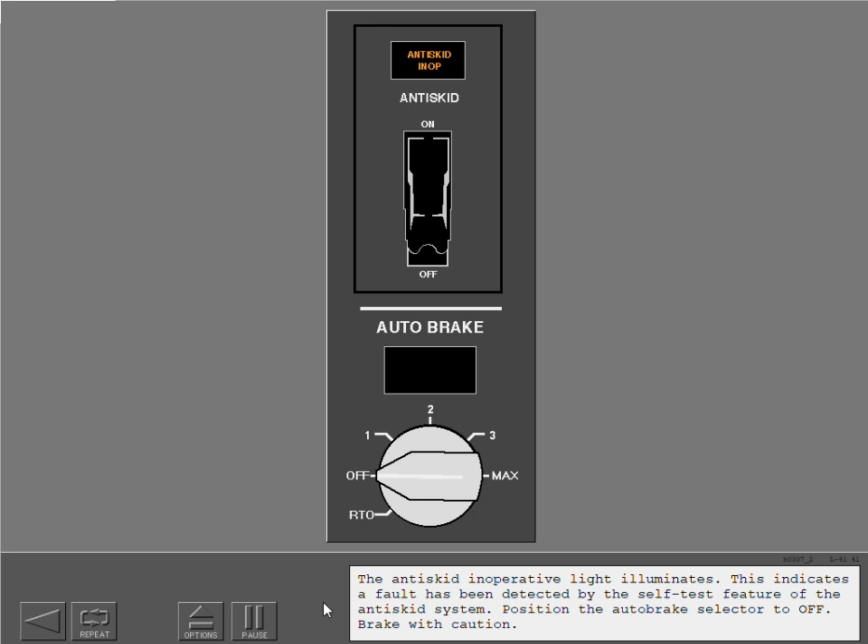The landing gear lever cannot be moved to up after takeoff. Probable causes are failure of the air-ground safety sensor or a popped circuit breaker.

A landing at the nearest suitable field is recommended. If this is not possible with the gear extended, pull the landing gear override trigger to bypass the safety solenoid and retract the gear on the captain's command.

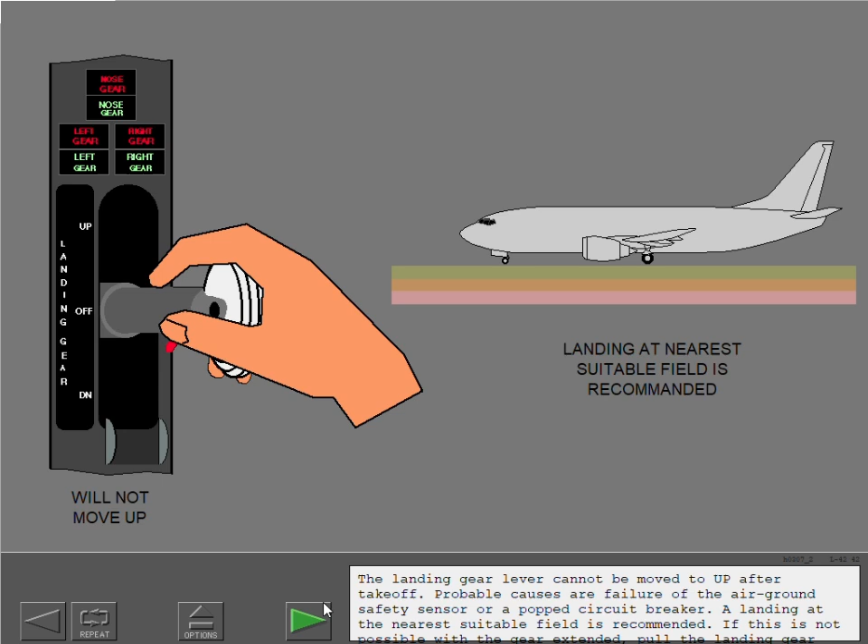The manual gear extension procedure is used when one or more green landing gear light does not illuminate. Study the manual gear extension and partial or gear up landing procedures in your operations manual.

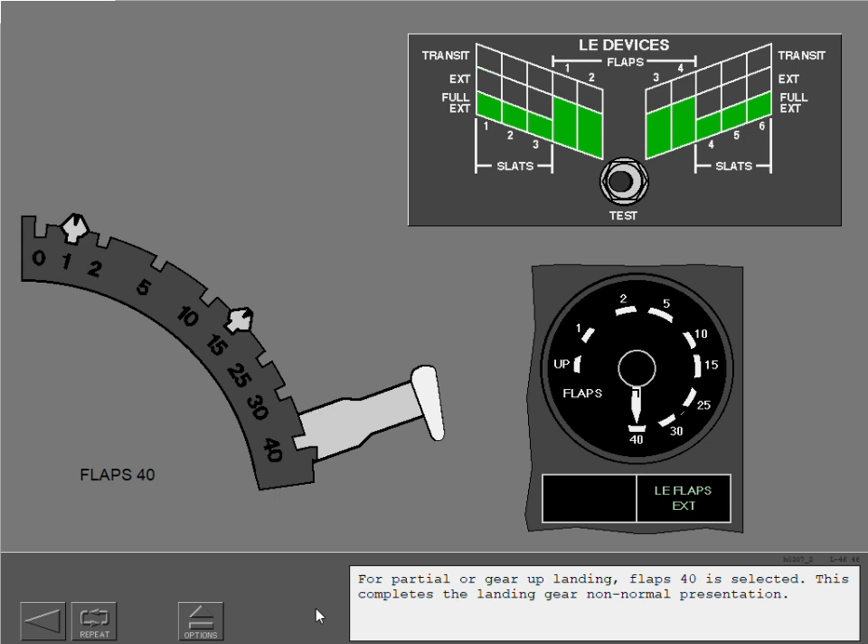For partial or gear up landing, flaps 40 is selected. This completes the landing gear non-normal presentation.